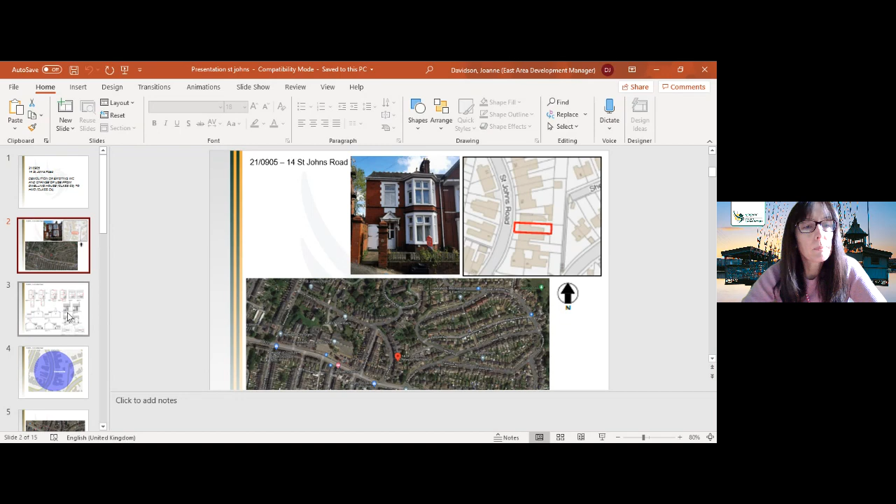So the plans we've been provided with, let me see if I can enlarge these. Okay, so across the top then we've got existing and proposed floor plans. Now the lawful use of the property is a dwelling, but you'll see possibly on these plans that we have multiple bedrooms on the existing plans, and I think we've explained this in the report, that the last use of the property was actually as a HMO, and again I'll go into a little more detail on that as part of this presentation. So what we've got in terms of the proposed ground floor is 2 bedrooms here, front and back, with communal space then towards the rear of the ground floor.

We then have 3 bedrooms on the first floor, beg your pardon. So 1 here under my cursor, and then a small room at the back, and then 1 proposed in the attic space. The only changes, other than obviously a little bit of demolition work on the back, which is this bit here, hopefully you can see my cursor, so that's being demolished. And the only other change, which we are linking to a recommended condition based on the licensing officer's comments, is the change of this door on the rear to a window as it serves a proposed bedroom. So that's it as far as the elevation and floor plans are concerned.

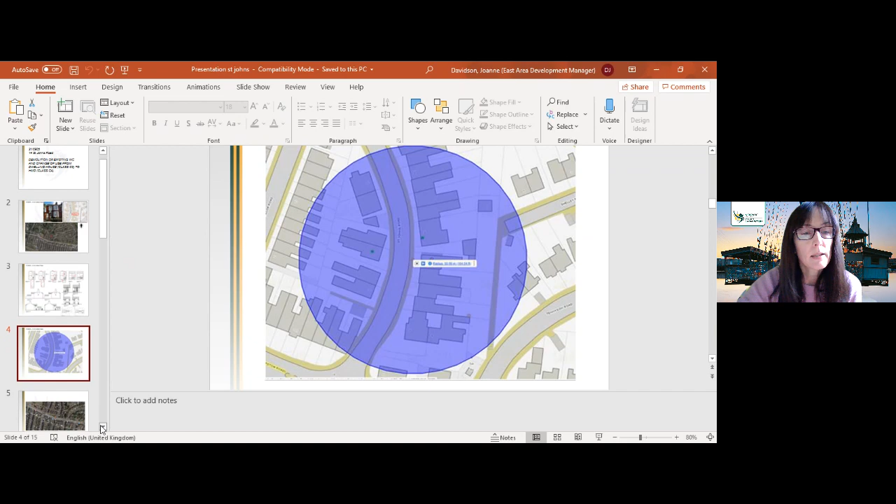And you may be able to see on here some green dots. So I'll hover over them on my cursor here and here. They're existing HMOs according to our records. And the actual site is under my cursor now here. So as you can see, if planning permission were to be granted today for this HMO, we would have 3 houses within this radius that would be in HMO use according to our records. That's 3 of 18, so that is 16.6%. Not the 15.8% we've cited in your report. So that's an update. And again, I'll further confirm that in this presentation.

So for those who aren't familiar with St John's Road and putting it into context, this aerial image perhaps gives a little bit more detail. So the main road we can see here under my cursor is the main Chepstow Road. And you can see St John's Road coming off here. Again, putting it into context, this is Eveswell Primary School. You've got, I think, just off the top here, Kensington Court Clinic.

But notably what we've said here is we've got bus stops to be noted. Under my cursor again, here, here, here. All within 500 feet, 150 metres of the site, and as I mentioned, along with the primary school, but also we've got a range of shops and services along Chepstow Road.

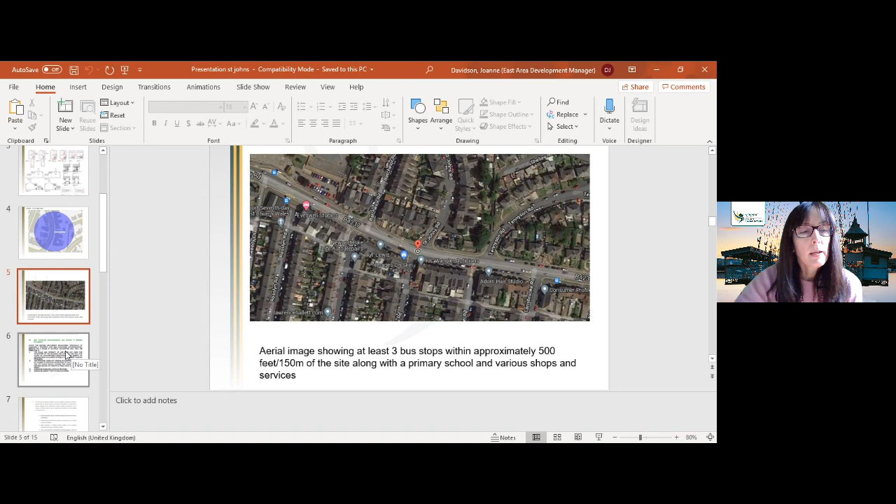So the key policy in the adopted local development plan relevant to our consideration of HMOs, and many of you have seen this before, is policy H8. I won't read it out, it's there, but it sets out the criteria and the main issues that we will consider when we are looking at HMO applications, and I think they're self-explanatory, and we'll go on to those further now in this presentation.

So, as you know, we also have the adopted supplementary planning guidance on HMOs that was adopted in 2017. And this is a relevant extract, I think. It sets out the positive elements of HMO conversions in terms of variety of housing stock. But we also know from past experience and knowledge that HMOs can also cause concerns and adverse effects, and these are set out in these bullet points here. Okay, I can always go back to that slide if you need me to, just let me know in due course.

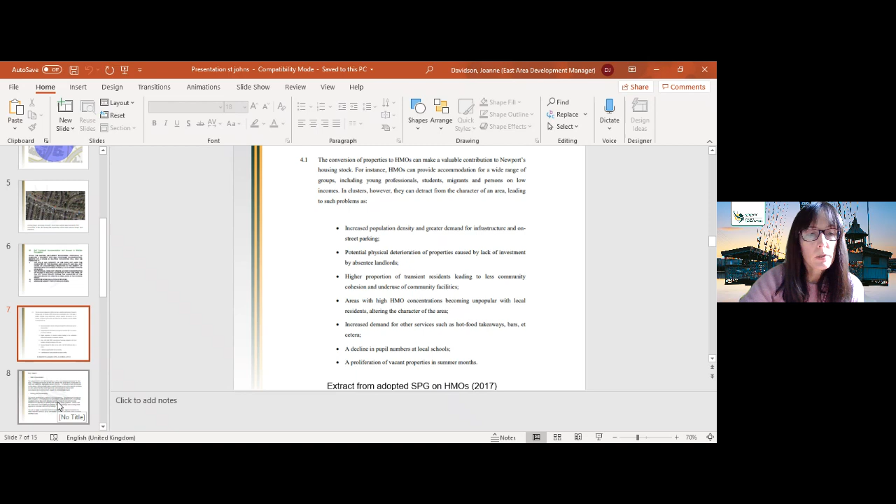So the key issues then, and again, like I say, we're probably familiar with these now because we've seen these many times before, are in officer view, HMO concentration matters and parking and sustainability issues. So for the purposes of this site, the adopted SPG on HMOs identifies a 10% concentration threshold, not the usual 15% that we have seen on other sites. So the threshold here is actually lower.

It's 10%. So granting permission for this site, as I mentioned earlier, this is a slight difference to what's cited in your written report, will take the proportion of properties in HMO use within the highlighted area to 16.6%. So clearly above the 10% threshold set out in the adopted SPG. And that needs to be given very careful consideration.

Now we know, again from past experience, that to robustly refuse a permission on HMO concentration issues, demonstrable harm must be shown, as previous appeal decisions on sites where the threshold has been exceeded prove that a mere exceedance does not by itself equate to demonstrable harm. And in your written report, we've pointed to a case on Llanthewy Road where we had exactly this issue. And in fact, I think that was about a 23% concentration there. And the inspector confirmed on that one that a mere exceedance does not equate to refusal or a robust refusal.

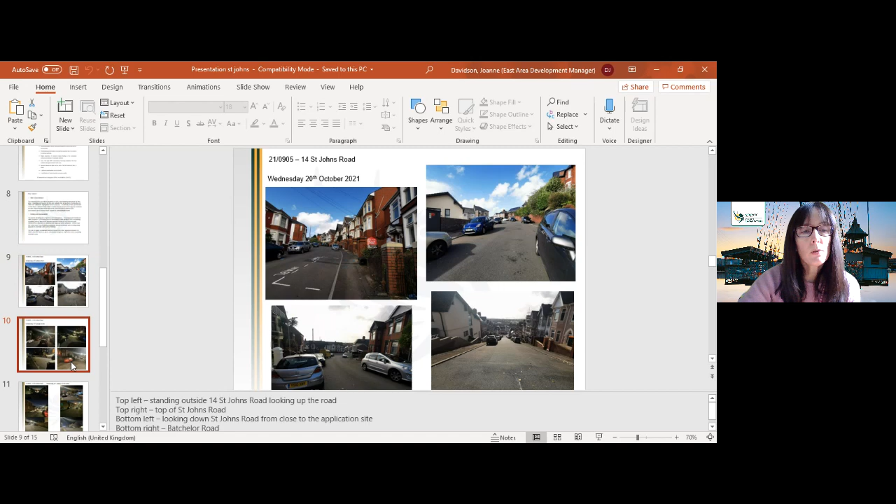So a few more photographs that we've taken as officers. And again, we've given the date and the time of these photographs on the top of the slide. So again, similar top left, looking up St John's Road. So these are evening shots when we would expect parking to be in higher demand. Top right, again, further along or up St John's Road, and again bottom left, further up St John's Road, and then an adjacent street on the bottom right, Batchelor Road.

And you can see from our site visits during the weekday evenings that we've noted there are parking spaces. And whilst I wouldn't say parking was consistently plentiful, nevertheless, parking spaces do arise. So our conclusions then on parking matters, as we know that this is very much an important issue to people interested in this application. You'll note from your written reports that we consulted 70 properties, 70 addresses on this application. We've had 3 objections and parking obviously is a concern. The councillors have also raised this matter.

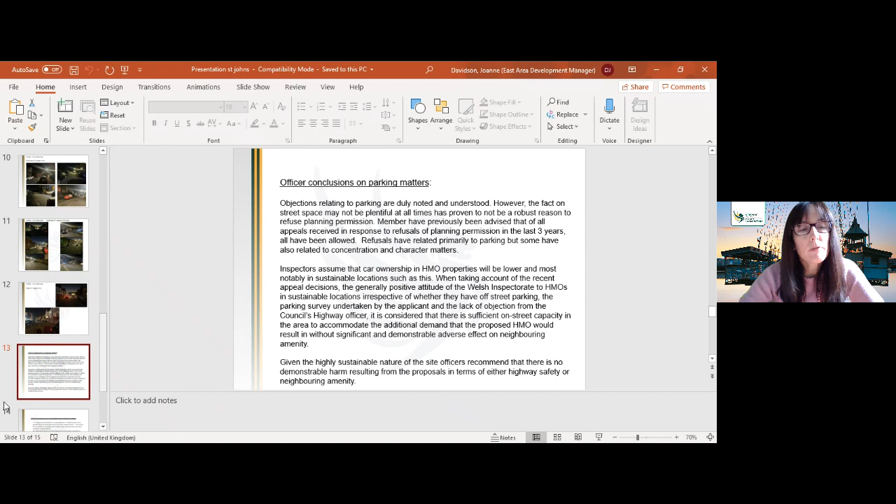Now, inspectors assume, rightly or wrongly, that car ownership in HMO properties will be lower, and most notably in sustainable locations such as this. And when taking account of recent appeal decisions, the generally positive attitude of the Welsh Inspectorate to HMOs in sustainable locations, irrespective of whether they have off-street parking, along with the parking survey undertaken by the applicant and the lack of objection from the council's highway officer, it is considered that there is sufficient on-street capacity in the area to accommodate the additional demand that the proposed HMO would result in, without significant and demonstrable adverse effect on neighbouring amenity or highway safety for that matter. Now, given the highly sustainable nature of the site, officers recommend that there is no demonstrable harm resulting from the proposals, as I've said, in terms of either highway safety or neighbouring amenity.

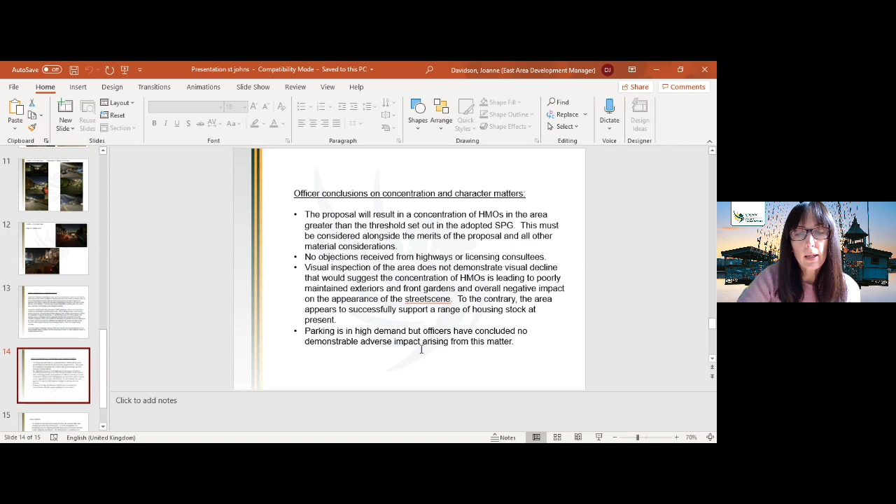So, officer conclusions on concentration and character. The proposal will result in a concentration of HMOs in the area greater than the threshold set out in the adopted SPG, as I've confirmed, and this must be considered alongside the merits of the proposal and all other material considerations. Now, we've got no objection from highways or licensing consultees, as you know, and visual inspection of the area does not demonstrate to officers, at least, a visual decline that would suggest the concentration of HMOs is leading to poorly maintained exteriors and front gardens and overall negative impact on the appearance of the street scene. To the contrary, we think the area appears to successfully support a range of housing stock at present. Parking is in high demand. We would agree with that, but officers have concluded no demonstrable adverse impact arising from that matter.

So other matters, and I touched on this at the start of the presentation, that I thought committee members should be aware of, and we have picked it up in our report. The property has been previously licensed as a small HMO, and it was occupied as such from 2015 to 2020. And in 2015, occupation of a dwelling by up to 6 unrelated people living as a household in a HMO, or what we would call a HMO now, did not require planning permission. So no enforcement complaints were received by the local planning authority for the duration of that use.

And on 25th of February 2016, and the reason you're seeing this application now, is that new regulations were introduced that created this new use class C4. So this puts small HMOs into a separate use class to a dwelling. So dwelling remains in use class C3. Now, the effect of this was to enable local planning authorities to control changes of use from dwellings to small HMOs. And a small HMO is a residence of 3 to 6 unrelated people living together as a single household. So the above new regulations could not be applied retrospectively. So I hope that slide is self-explanatory.

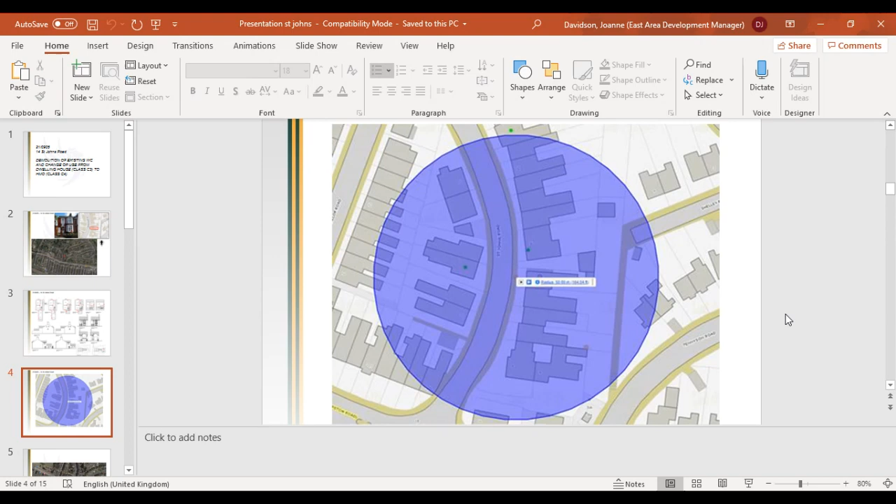It does, thank you. One of the points I wanted to raise about it was it depends where you centre that circle. If you centre that circle, say, a couple of metres to the right, or the east as we're looking at it, then you would capture the properties on the bottom right-hand side. And then if you move the centre of that circle down a bit, then you would, so when you've got properties that are say 80% captured,

it seems a bit unfair in a way to leave them out, like the one that you've got at the top of the screen there. You've got an HMO, and just by virtue of where you put the centre of your circle, that one is excluded. So it's a bit of a subjective operation, I think.

I'm not sure if it's subjective, Councillor, because obviously we draw that line in accordance with the SPG and how it sets out that we should draw it. But there is, I suppose, a potential dialogue to be had in terms of whether the 50 metres is the right distance to draw, whether you should put the centre point slap bang in the middle of the address point, the actual footprint of the house, or the middle of the front garden.

But I suppose the basic point is that there has to be a line somewhere if we're going to apply a test of this nature. So what you see in there accords with the SPG as adopted and as it sets the test out right now. And clearly, if there is to be a dialogue about that test, whether it be the extent of the radius or anything else, then that needs to be done separately as part of a separate discussion over the content of the supplementary planning guidance, I would say.

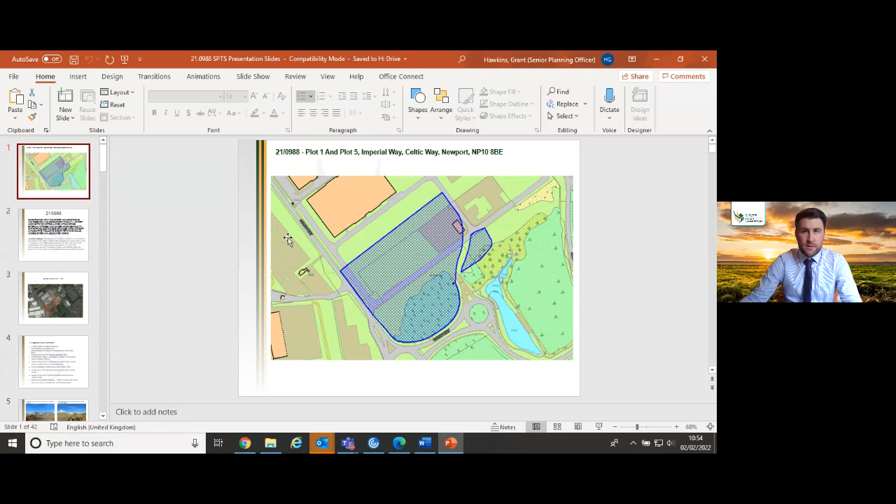Can we all see my full screen there, please, Chair? Yes, indeed. Brilliant. Okay, so this application at plot 1 and plot 5 Imperial Way, sorry, on Celtic Way. The site is outlined in blue here. So the application is for the construction of a 2-storey manufacturing and research development facility, four-storey administration office linked with a linked atrium space, external storage of nitrogen and oxygen, car parking, sustainable drainage, hard and soft landscaping, access gates and associated works.

So the recommendation, it's a little bit of a long one, I'm afraid, so I'll read it out and then I'll just break down what that means. So we're requesting delegated authority to be given to the Head of Regeneration, Investment and Housing to issue a decision to grant planning permission with conditions. Firstly, subject to a Section 106 legal agreement, also with delegated authority to refuse the application if we fail to agree that legal agreement with the applicant, and on receipt of no objection from Natural Resources Wales. So I will touch upon that.

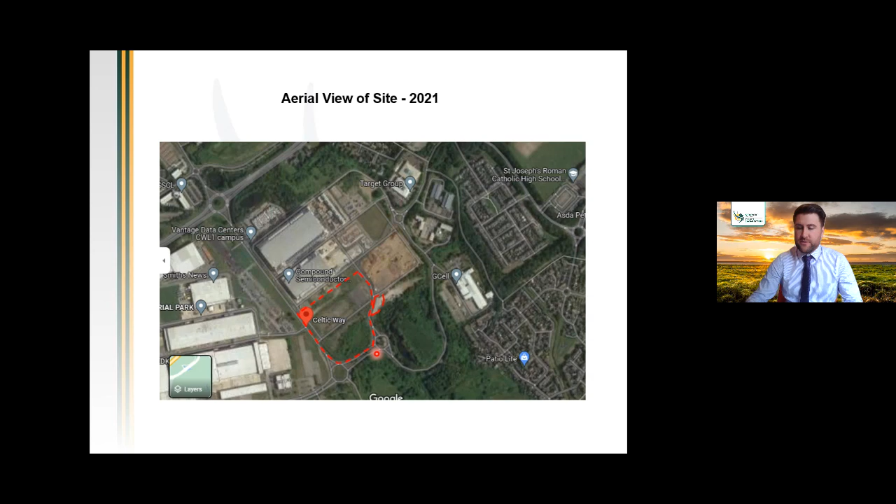And then the site of importance for nature conservation beyond the highway to the south of the site, which is further down here, so to the south of Duffryn Way, which splits the site in that area. 30 metres to the south of the site is an archaeologically sensitive area. Beyond that is the Wentlooge Levels special landscape area, approximately 360 metres south. The Gwent Levels is approximately 350 metres to the south of the site as well. And the nearest residential properties, as I pointed out earlier on the aerial plan, are 300 metres to the southeast and 400 metres to the northeast.

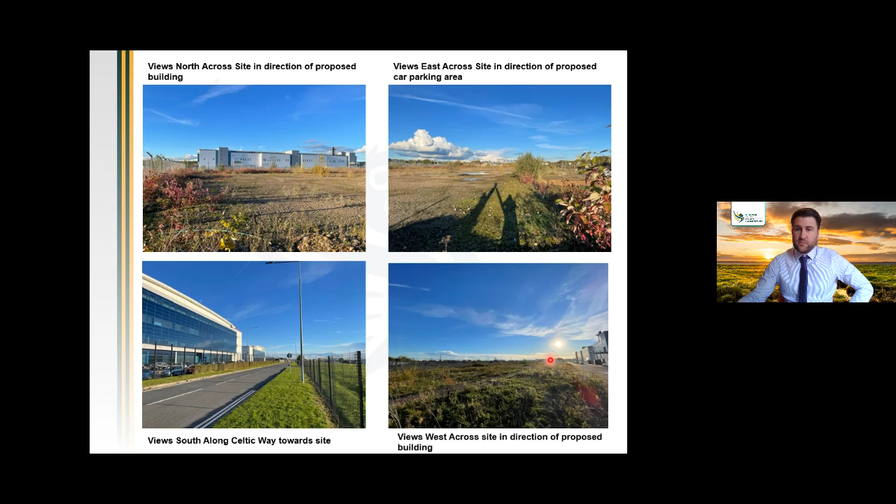The key considerations for the application. First of all, the principle of the development. As I mentioned, it's previously developed land, it's within the urban boundary, and it is designated for employment use and allocated within the local development plan. So in terms of the principle of development, we feel that it's pretty sound and it's acceptable in principle, subject to the relevant material planning considerations.

The social and economic impact of the proposal, the design of the building, visual impact on the surrounding landscape and proposed mitigation measures, impacts on ecology, trees, highway safety and parking, active travel considerations, of which I mentioned there is a financial contribution which we'll touch on later in the presentation, impact on residential amenity, air quality, drainage and flooding, and heritage impact and archaeology. So those are the key considerations that we'll be going through within this presentation and have been considered within the officer's report.

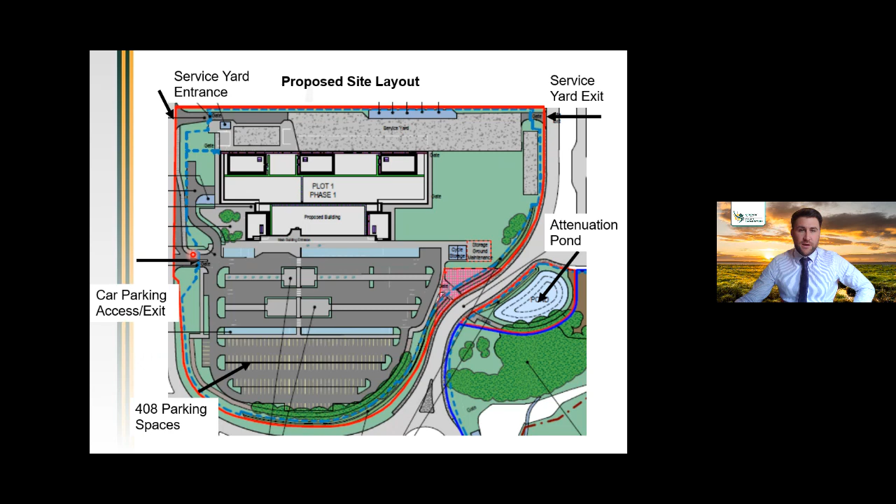I'll run through the elevations and dimensions in a moment, but to the south, the front facing elevation is the primary front of house elevation. This is the 4-storey office and administration building. To the rear is the 2-storey manufacturing and research and development facility. Car parking is located to the south of the main building. There are 408 spaces proposed. The service yard is located to the north, to the rear of the building, where service vehicles will access off Celtic Way and egress onto North Lake Drive. The proposed access and exit for the car park is located off Celtic Way also.

So I just wanted to touch a little bit upon SPTS Technologies Limited, who are the applicant. So this would be their new headquarters. They currently operate from a site at Ringland Way, which is just off the M4 motorway at the Coldra roundabout. So SPTS design, manufacture and sell semiconductor capital equipment, which provides the solutions needed to deliver the next generation of technologies for the semiconductor and microelectronics industry. It's a very highly technical process.

So yeah, broadly speaking, they design and develop, manufacture and sell technology for microchips and semiconductor units, which will go into your everyday technologies, your mobile phones, your iPads and technologies like that. So it's an evolving business based on the fact that we're reliant on technology in everyday life moving forward.

The business were recognised by the Queen, having received the Queen's Award for Enterprise and International Trade across 3 years, and for innovation in another 2 years. The company has been recognised by Welsh Government for their contribution in increasing jobs and growing the economy within Wales, and they've been given anchor company status. SPTS currently employ 360 members of staff at the existing Newport site. They employ 590 across Europe and the wider area.

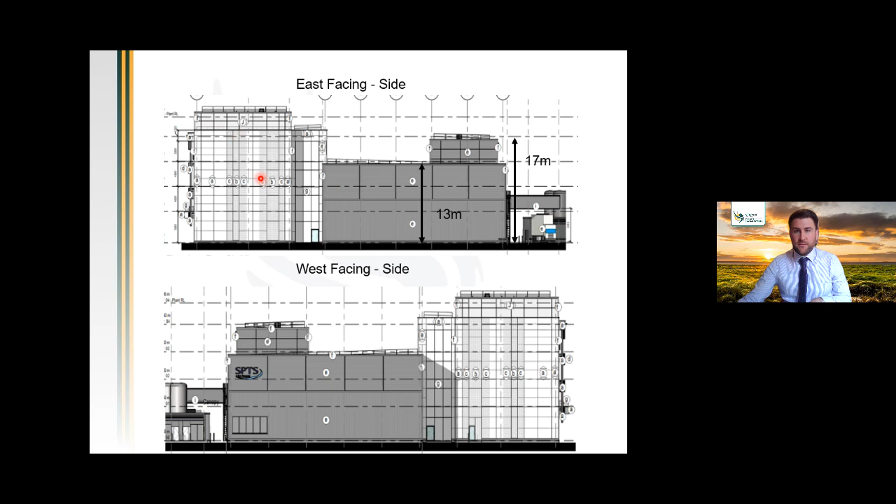So the design brief was to create a bold architectural statement. The 2 mass forms of the manufacturing and administrative buildings are differentiated by the contrast of materials. I'll show you some computer generated images now, because I appreciate these elevations have quite a lot of detail that might not be that clear. But the front of house administration block is made up of powder coated or anodized finished metal sheet cladding panels to give a contemporary modern appearance, with semi-matte black perforated rain screen panels and brise soleil throughout the front elevation.

The rear elevation is more of a dark grey matte or matte black cladding, which is a little bit more simple, a bit more industrial in its appearance, given that it does represent the manufacturing processes which will undertake to the rear. So it's a highly technological business, and the proposal and the processes are taking place within the building, and the team wanted a design to effectively match that nice contemporary looking building.

So here are some computer generated images as we look across the site to the front elevation. This is the south facing administration block. You can see the lower scale, darker manufacturing building to the rear. This is as you look square onto the south elevation from the car park. The main access point is here. This is a recessed gap within the front elevation.

This is looking to the rear of the building, to the side of the manufacturing part. As you can see, there's a canopy here where service vehicles will access and reverse into the service yard, unload and load at the rear. There's some indicative images here of the interior of the building. Just thought it might give some context for what the building may look like inside.

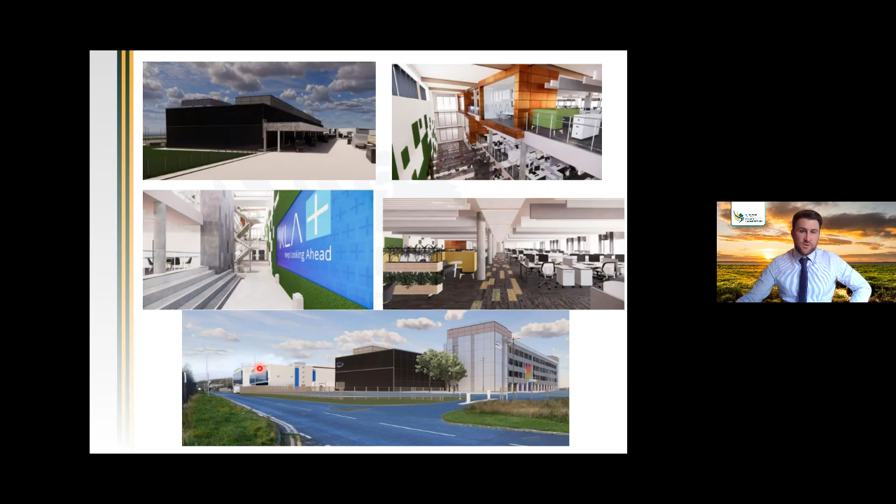This sort of open atrium space, high level office space, lower level office space. As you can see here, sort of the lobby area. At ground floor, there'll be canteen, cafe, meeting rooms, a general lobby and reception. First floor and above at the front will be predominantly office blocks and meeting rooms. And then, as you see here, this is taken from Celtic Way, the front of the building, administration block, manufacturing block, and into other industrial buildings located along Celtic Way.

So I'm not going to go through all of the 4 floor plans because it's quite difficult to show you the exact layouts given the size of the plans, but effectively what we've got at the front 4-storey element here is predominantly open and mixed office use space with meeting rooms, boardrooms, for example, staff welfare facilities and stair routes, along with areas for ducting from the lower ground areas.

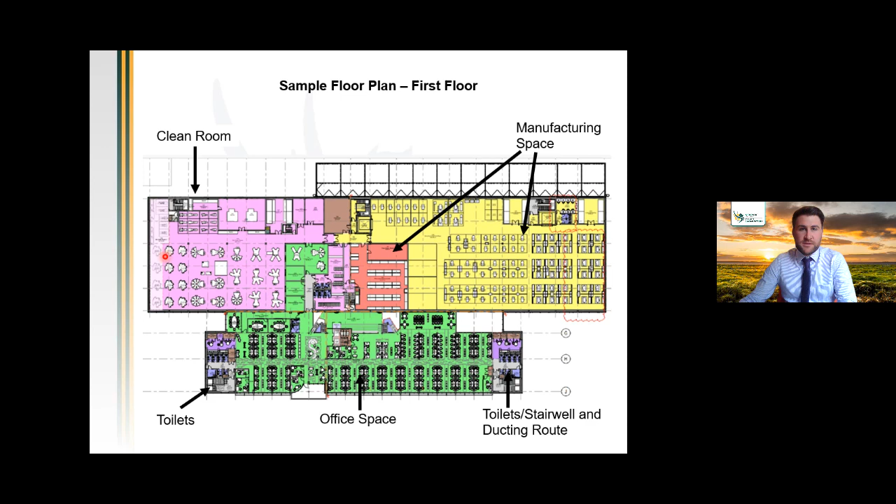To the rear, we've got manufacturing space, as you can see in yellow and red. The pinky purple area here is a clean room. So given the nature of the microprocessors and the technology which has been produced here, they require a clean room to make sure there's no contamination of the product. So this is where I would anticipate you'd expect to see people in bodysuits to make sure that nothing gets contaminated during the manufacturing and research and development process.

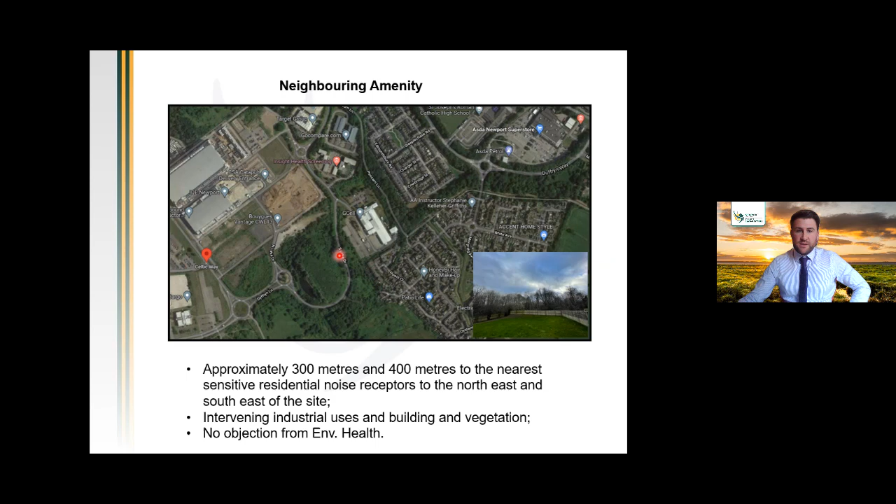So if we move on to neighbouring amenity, as I mentioned, the sites here, you've got residential properties over here and here, intervening landscaping areas, existing industrial uses, highways, approximately 300 metres and 400 metres respectively. So we don't anticipate there's going to be any adverse impact on residential amenity given the significant separation distances and intervening uses and vegetation. We've had no objection from environmental health either. There are some conditions that we'll be proposing to protect residential amenity.

There will be plant equipment set within the roof behind the walls on the roof. Prior to the installation of those, we'd like a noise assessment to see whether there's any mitigation required to quiet that plant equipment. The construction environmental management plan will control working hours in line with the working hours of the other construction developments within the vicinity of the site which are currently underway, and also to protect measures such as dust, noise, vibration, so fairly standard things that you'd expect within a CEMP.

There isn't any piling works proposed for the foundations of the building. However, we have put a restriction on the hours of any piling work just in case that does change, in order to protect residential amenity. The lighting of the site is not anticipated to cause any wider issues for residents given the significant separation distances and intervening buildings and vegetation. But again, we want to see a final external lighting scheme via condition.

We've also put a condition on restricting the use class of the building, specifically to what they're applying for, i.e. the manufacturing of the semiconductor equipment and the associated office space, just in case the building changed hands and there were issues raised over and above what had been considered within this application.

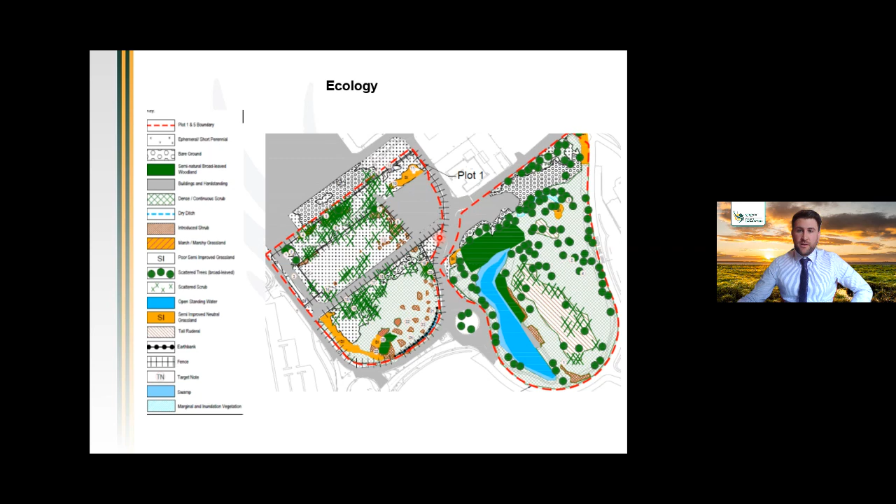So the application originally included a preliminary ecological appraisal of the site, including that habitats plan that I just mentioned. The Council's ecologist and Natural Resources Wales requested updated surveys and reports in relation to ecological interests to make sure that we have a full understanding of what the impacts might be, what mitigation, compensation, enhancement measures will be applicable.

Consequently, the site was reduced on plot 5. An area of woodland has been retained, which acts as a buffer between the site and the SINC, which is the pond to the south of plot 5. So we consider that to be a merit. The following list of information was submitted with the resubmission of the ecological information. So effectively, these reports and surveys all fed in to the ecological impact assessment and the updated soft landscaping plan.

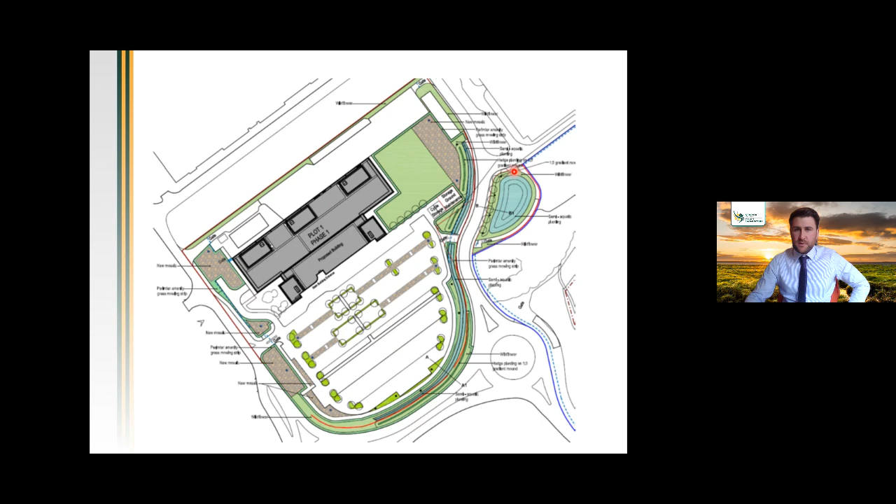This table has been taken from that landscaping plan, which shows a breakdown of the square meterage of each of the proposed planting types. So that gives us a clear indication of how much has been replaced in terms of mitigation, compensation and enhancement. So the Council's ecologist has reviewed the submitted information that was submitted in January, and they generally support the mitigation, compensation and enhancement which is set out in the ECIA.

However, what they have raised is that there should be stronger links between that report and the landscaping plan. That should be in the form of diagrams, to make sure that we know exactly what we're getting on the plan, where we're getting it and how that report translates spatially onto the landscaping plan. It's been discussed with the ecology officer that could be secured via condition discharge, so we can secure those details via condition.

With regards to Natural Resources Wales, they have been reconsulted on this information, but owing to the date that it came in, their 21 days, which is the statutory period for them to respond, doesn't expire until later on this week. So at this stage, we haven't had a final response from Natural Resources Wales, which is why we're requesting delegated authority from the committee for the application to be approved, and delegated powers on the basis that we don't get an objection from Natural Resources Wales.

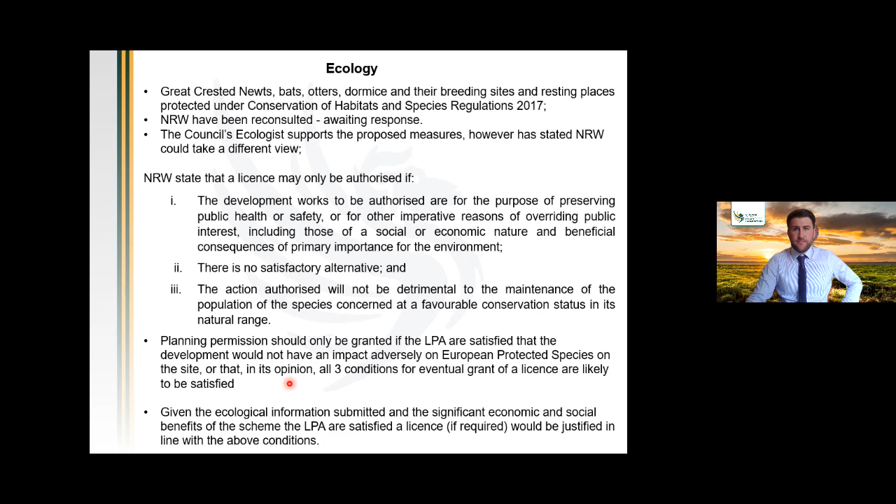So that's ecology. Oh, one more slide, sorry. Yeah, I think I've just summarised in there what I've just mentioned. So if we do get an objection from Natural Resources Wales in relation to the ecological matters, we will try and resolve that between the applicant and Natural Resources Wales if there's minor amendments or tweaks that can be made. But in the event NRW do maintain their objection and we cannot come to a satisfactory agreement, then we would have to bring the application back to be determined by the planning committee.

So moving on to the landscaping and visual impact for the scheme. As I mentioned, the site's located in plot 1 and plot 5. So plot 1 is where most of the built development will be. The landscape officer has raised no objections to the proposed building in principle, but has raised concerns about the external proposals, the layout of the site and its landscaping and the overall materiality of the site.

So a landscape visual impact assessment was initially submitted with the application back last year. However, the landscape officer does not feel that this adequately addressed the overall impacts of the proposal, particularly at a more localised level within the industrial estate or on the publicly visible spaces around the site. It was therefore requested that a new visual impact assessment was submitted. However, this hasn't been received. So an assessment has been made based on the information that has been submitted and is before the local planning authority. And I've also carried out site visits from the various viewpoints that have been outlined as required by the landscape officer.

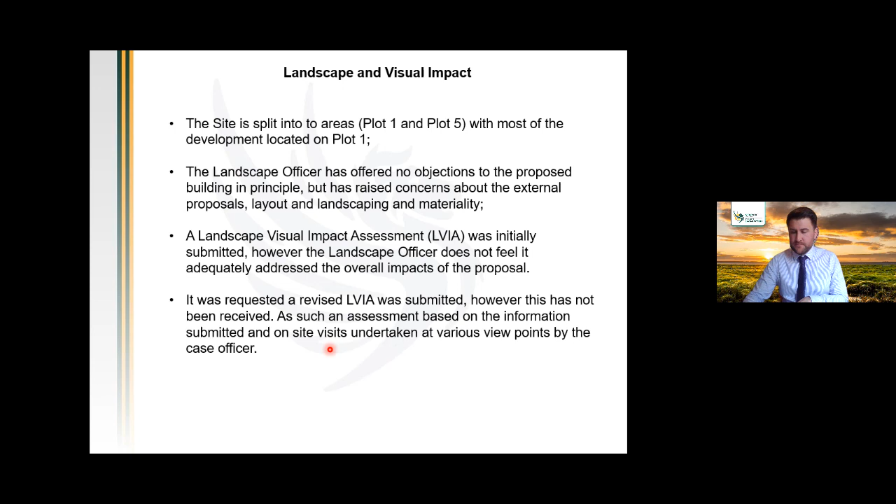So these viewpoints from the wider area were requested from the Wales Coastal Path, the footpath near St Mary's Church in Marshfield, which is a grade 2 listed building, and the Northwest Residential Development. So this photograph here was taken by myself from the Wales Coastal Path. It's approximately 3 kilometres from the site. This blue dot here is where I was stood when I took the photograph. The direction of the photograph is towards the site over here.

Now you may or may not be able to see, depending on the size of your screens, just above my red cursor there's the top of a white building. That is one of the existing buildings on site. Now that existing building has a maximum height of 24.5 metres. The proposed building as part of this application would broadly be located to the south of that site, sort of in front of that site, and will go up to a maximum height of 21 metres. So it is a few metres lower than the highest point of the building that you can see there.

So there may be views visible from the Wales Coastal Path, but given the 3 kilometre separation distance, given the scale of the proposal and the existing buildings on site, officers consider that there isn't any significant or adverse impact on visual amenity or the landscape from the Wales Coast Path.

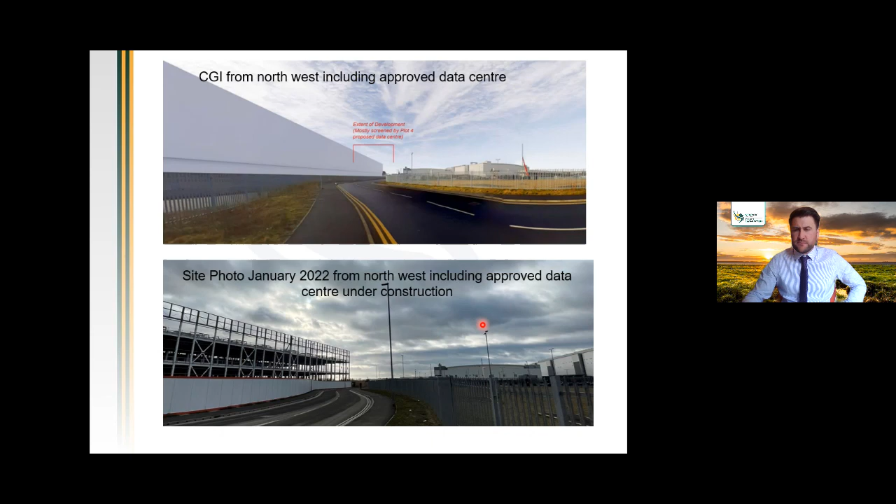So this is a CGI image taken from the north west of the site along Dufferin Lane. Shows the anticipated viewpoint of the building here, the administration block with the lower manufacturing units behind. Just over here you can see that data centre building which has been approved and under construction.

And again, this is a photograph taken from Dufferin Lane this month. This is the existing IQE building, which the proposed site is just to the south of. Then you've got the under construction data centre over here.

So just to give you a visual context of the site, the concerns from the landscape officer with regards to the immediate visual impact is that the proposed planting scheme along these boundaries, along the southern boundary and around, is quite low-lying vegetation. There are some trees, but perhaps they're not structural trees, so they may not do an awful lot to screen what is quite a big building from the immediate highways and public walking ways.

Officers, there's no reason based on the landscape plan put forward that more structural planting and better screening couldn't be achieved on site around the perimeters. So we are suggesting that a condition is applied to the conditional regime, which requires further details of landscaping, soft landscaping for the site and the hard landscaping of the site. So we're confident that we could achieve something on the perimeters which is perhaps better than what's initially been suggested within the landscape details.

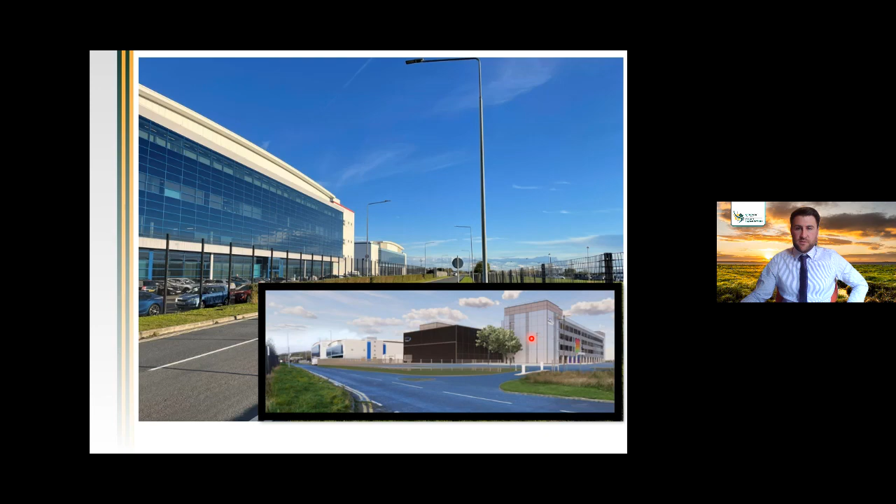So to summarise, the site does face the sensitive landscape to the south, which is the Wentloog Levels Special Landscape Area. It is located within an existing industrial estate and amongst other buildings of similar scales. For example, the original data centre building is 200 metres wide by 105 metres in width, at a height ranging between 22.25 and 24.5 metres. The recently approved data centre to the northeast is 142 by 100 metres to a height of 20.6 metres.

Our building is 135 metres total width, a maximum height of 21 metres, but the main bulk of the building will have a maximum height of 17 metres at the front and 13 metres to the rear. And the depth is, I think, about 80 metres. So again, the landscape officer has no objections in principle to the building, but there are concerns with the visual impact on the immediate surrounding area, which we think can suitably be secured via conditional discharge.

Moving on to highway safety and parking. So owing to the scale of the development being a major planning application and owing to the size of the building and footprint, a transport assessment was submitted with the application. This has been submitted along with TRICS data for comparable uses, as well as data from the existing SPTS site at Ringland Way. The council's highways officer has reviewed and is satisfied that the traffic impact on the surrounding area will not be significant.

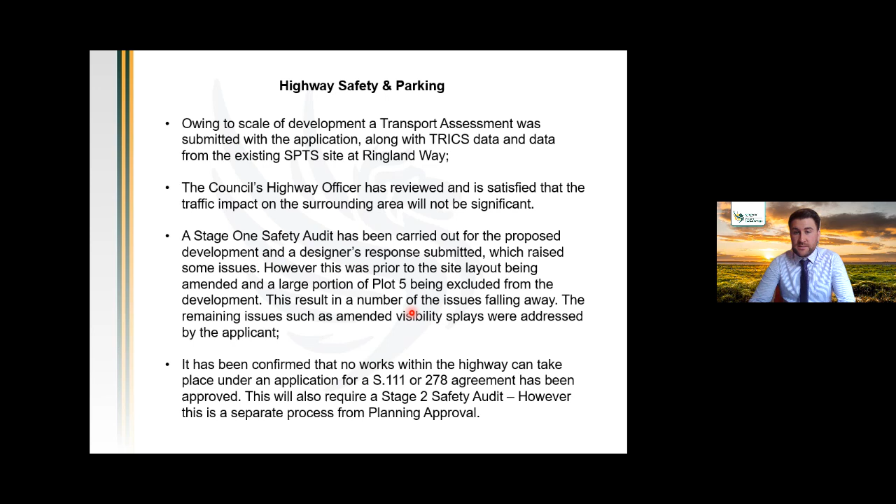Highways have confirmed that any works within the highway would need to take place under the relevant highways agreement, so a section 111 or section 278 for works within the highways, and these would also require stage 2 safety audits to be undertaken. However, these are separate processes from planning approval.

So if we move on to parking, the first table there shows the parking requirements for the proposed uses of the building in accordance with the SPG. The second table takes those uses, compares that with the parking requirements, the relevant floor area of that section of the building, and then creates the total number of spaces for each breakdown. So the total number of required parking spaces based on the SPG is 390 parking spaces.

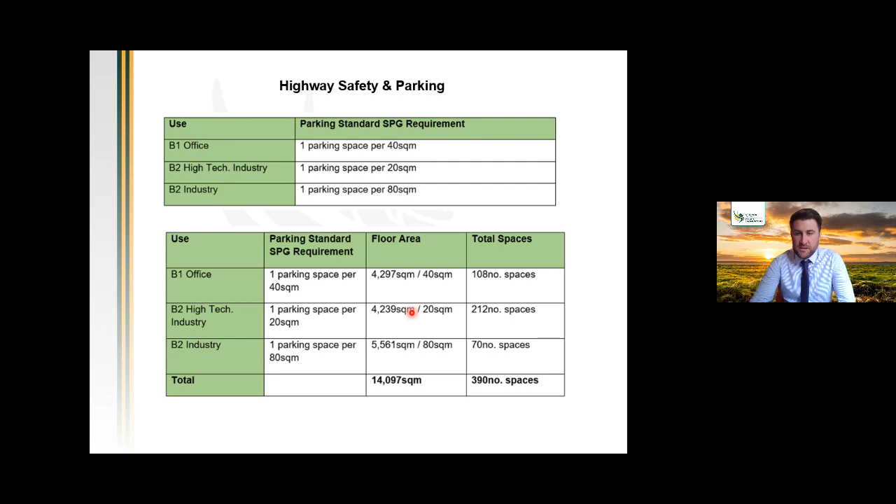So, staying on the same subject, but moving on to active travel. A travel plan was submitted with the application. This is a statutory requirement for any major planning application. That includes measures to be incorporated at the site. So in terms of cycle storage, it's been calculated based on 350 members of staff working at one shift at a time. 88 cycle spaces that are secured would need to be provided, along with 18 open short-term spaces. The site plan shows the location of the secured cycle storage, and a condition is recommended to agree the specific design and visual appearance of that.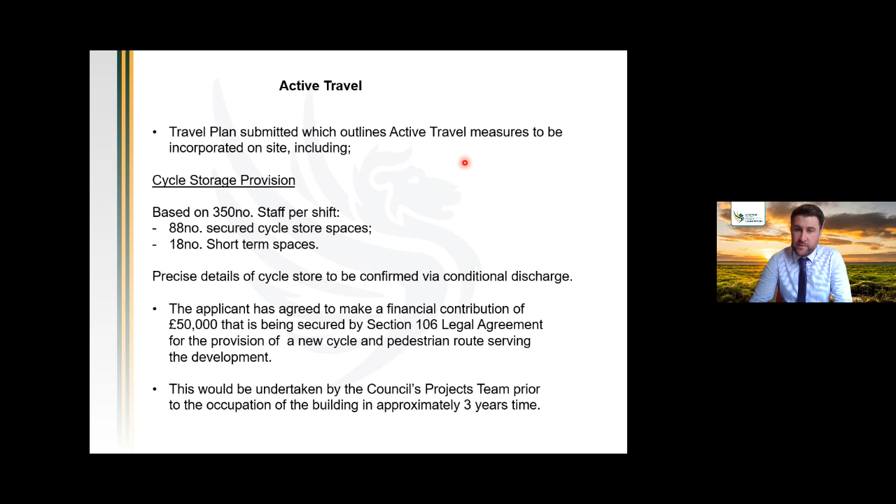Also, for this application, it was requested that the applicant makes a financial contribution, which is secured by Section 106 legal agreement, for the provision of a new cycle and pedestrian route serving the development. They've agreed to pay a contribution of £50,000. The works would be undertaken by the council's projects team prior to the occupation of the building, which is in approximately 3 years' time.

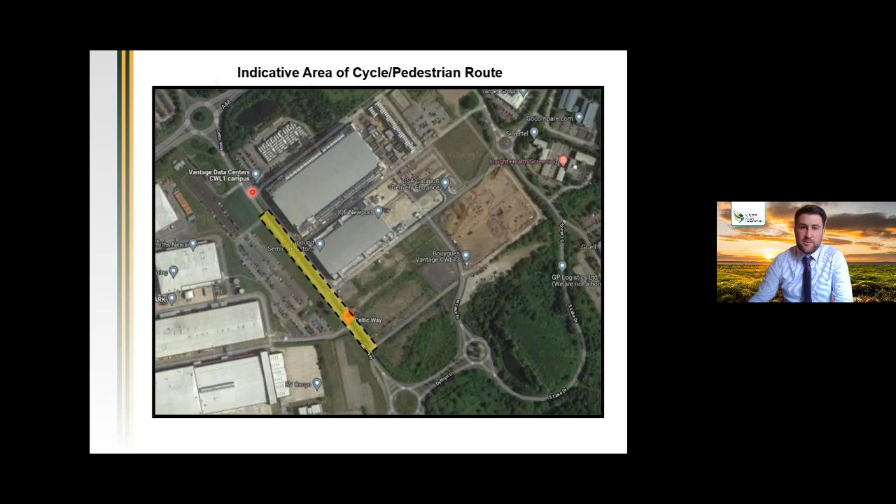So the reason for this is the site is located here, along Celtic Way, as identified in yellow. There is no pedestrian footpath either side. It is highway verge. So there is no safe route to encourage active travel or sustainable modes of pedestrian access to the site from Celtic Way, because this footway terminates at the access to the data centre here. So this yellow hatched area here broadly identifies the location where the pedestrian and cycle route would be installed by the council's project team. This would then link up to the footway, bus stops, etc. located on the A48. So that is considered to be a merit of the scheme to encourage active travel to the site.

So moving on to air quality, an air quality assessment was submitted and reviewed by Environmental Health. This raised no issues. The site is not located within an air quality management area, nor is it within a buffer zone. A condition was requested by Environmental Health to secure details for HGV routes during the construction period to avoid AQMAs. This is suggested to be controlled via condition discharge.

The council's environmental health officer also requested a financial contribution towards the monitoring of air quality within the vicinity of the site. For planning purposes, that would have to be secured by a legal agreement. However, a Section 106 agreement can only be sought when it would be necessary to make a development acceptable in planning terms, would be directly related to the development, and would be fairly and reasonably related in scale and kind to that development. The site isn't located within an air quality management area or even a buffer zone. The AQA concluded that there would be no significant impact on air quality from this development. Therefore, we didn't pursue any financial contributions towards monitoring, as this didn't seem reasonable or necessary in this instance.

So flooding and drainage. First of all, the site is not located within a flood zone, so there's no flood consequences assessment required. However, owing to the size of the development, it does require sustainable drainage systems. This would be separate approval from the council's SAB, which is the Sustainable Urban Drainage Approval Body.

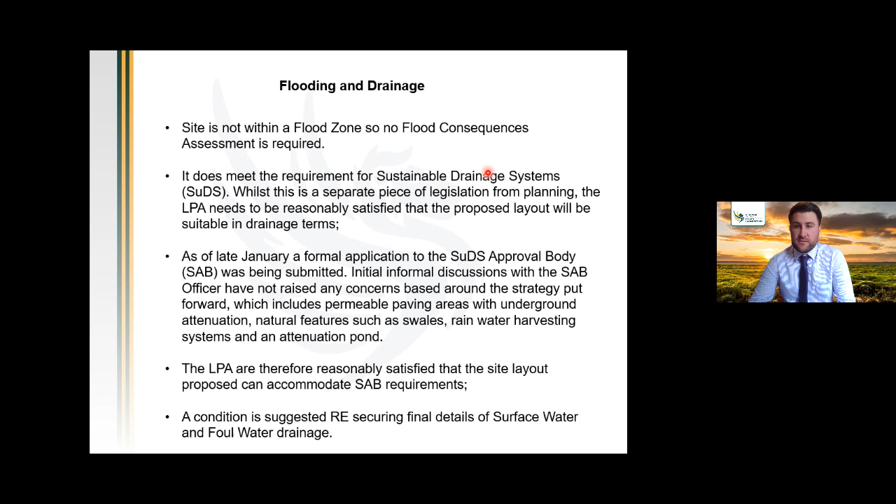In principle, the SAB officer confirmed that this all seemed to be fine and didn't anticipate there being any major issues. So overall, we're satisfied that the site layout that we would be approving as part of this permission would be able to accommodate the SAB features. However, we would apply a condition just to secure final details and implementation of the surface water and foul water drainage arrangements.

In terms of heritage and archaeology, a desk-based assessment was submitted, reviewed by the Council's Historic Building and Conservation Officer. It was concluded that there'd be no material impact on any setting of any historic assets. Cadw were consulted as part of the PAC report and took the same view. In terms of archaeology, there's a sensitive site nearby to the south of the site, but this site has already undergone ground disturbance, and there's not considered to be any remains on site that would be impacted. So Glamorgan Gwent Archaeological Trust have offered no objection to the scheme.

So if we just summarise the key considerations, the site is for the reuse of previously developed land within the urban boundary, which is allocated for employment use in the LDP. This would allow SPTS to expand the existing workforce within Newport from 360 staff to 460 staff on occupation of the building, with this phase of development designed to accommodate future growth up to 650 staff. There would be future expansion opportunities onto the adjacent plot, which will be under the ownership of the applicant, and could relocate existing European processes to Newport and create further job opportunities. I must highlight that that is not something we can really give weight to, but it's just showing there are opportunities for this company to expand further within land that they own adjacent to the site.

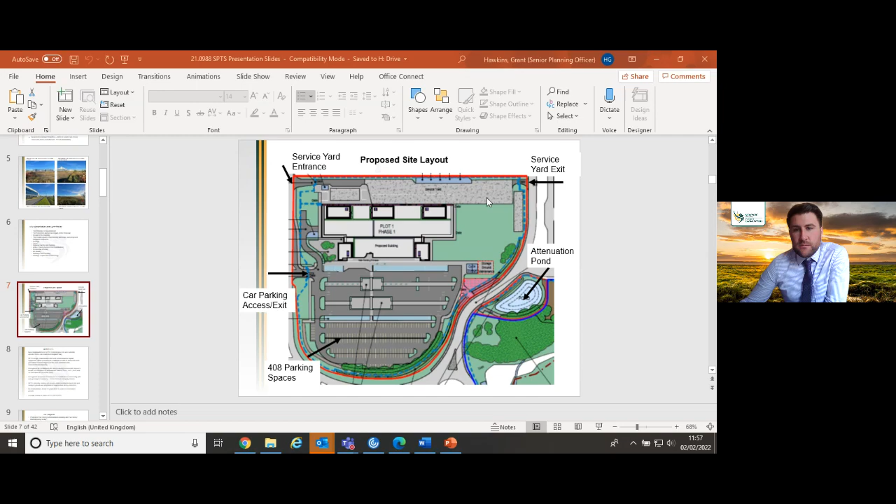What concerns me is, as I say, effluent, which is not supposed to go into the drainage system. How do they actually? I can understand everything except that bit, that the service yard goes into that pond and then it goes into the drainage system. And obviously, we're talking about the service yard. It could be fuel, petrol, anything really.

So I don't want to say something that isn't strictly true, so I'm going to be careful what I say. But I understand that reed beds are proposed within the site. Now, I don't know if that's explicitly with regards to the attenuation pond, to potentially clean any water. That may not be applicable for the attenuation pond. But what I would say is the SAB application, which is a separate planning approval, does look at the sustainability of drainage, but not only that, there's certain criteria that need to be met. Now, one of them is biodiversity.

So within the scope of that application, if you're looking at possible filters or things like that, which you typically associate, if you did have a car park, for example, you would have oil interceptors, because anything coming through the drains would intercept the oil prior to it being released. I would suggest that is something that may be looked at under SAB. Notwithstanding that, we do have a surface water and foul water drainage condition attached. So we could require specific details of that if necessary when we are discharging that condition.

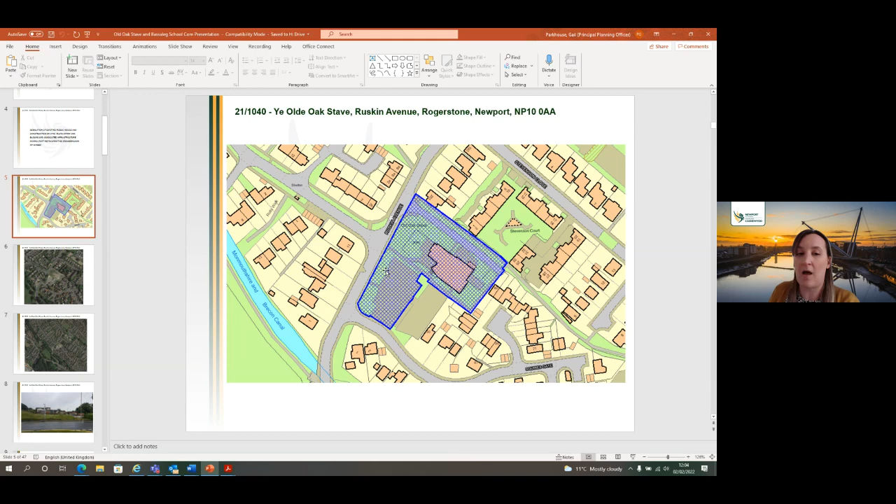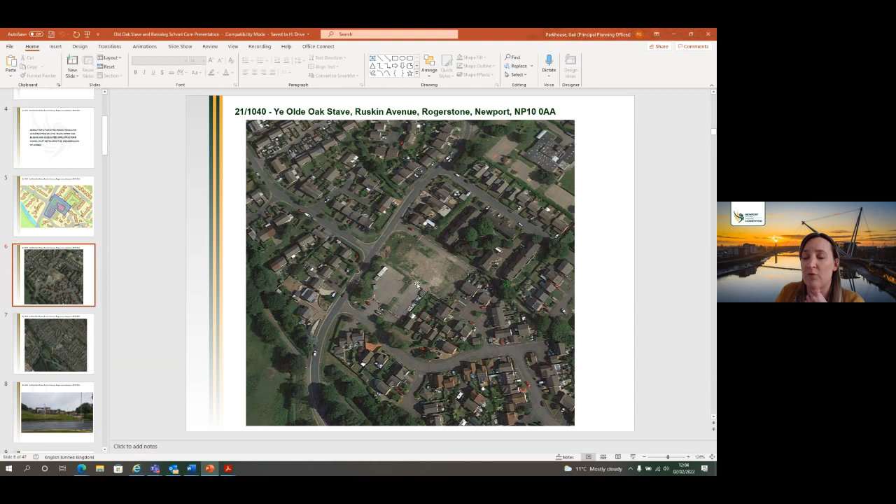Like I said, it's for 21 flats and associated infrastructure works, including car parking. So I'll just give you some aerial views of the site to hopefully jog some memories. It was previously occupied by a pub or restaurant, which is now being demolished, as you can see on the slide. You've got Ruskin Avenue running along here, and I'll give you a slightly wider image. So this is the site in here. You've got Ruskin Avenue running along here. You've got Cefn Road to the south here. And then you've got Mount Pleasant Primary School here, and then the residential areas of Mount Pleasant and the wider areas of Rogerstone.

And then also, just to mention, you've got the Monmouthshire and Brecon Canal running along here. So the reason why this application has come back to us is to propose the omission of 6 affordable housing units from the scheme, which were previously secured through a legal agreement, along with contributions towards leisure and education. The scheme otherwise is unchanged.

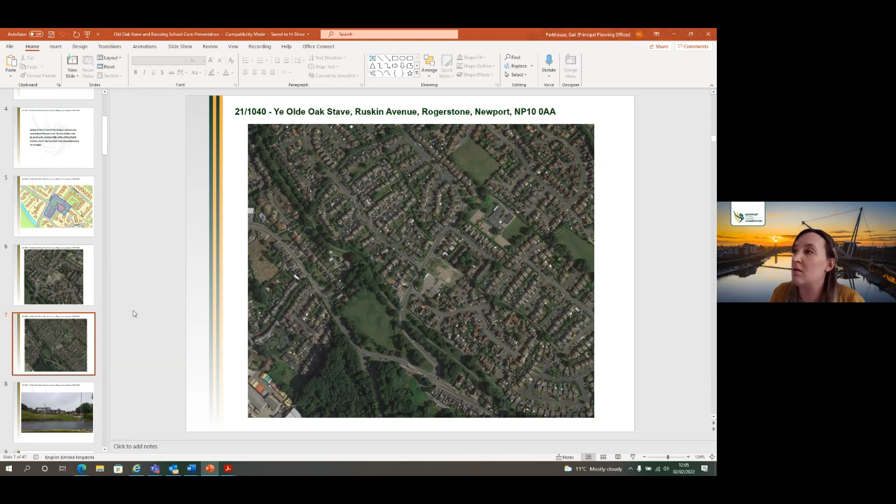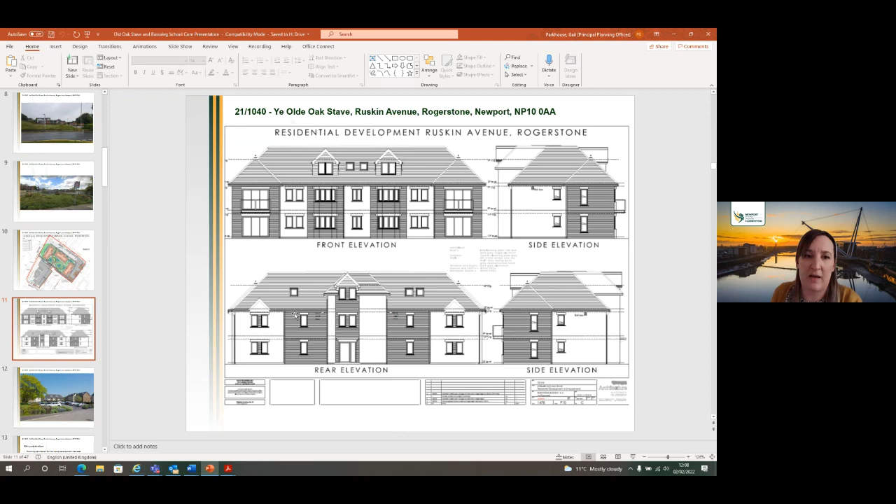And I will just show you a computer generated image of the site taken from the southern car park. You'll note that there's 3 houses. You can just see the edge of one house there, 3 houses here. They're separate from the site, but they also have an extant planning permission. Works haven't started on those yet, but it just gives context of what the site would look like with both developments being built out.

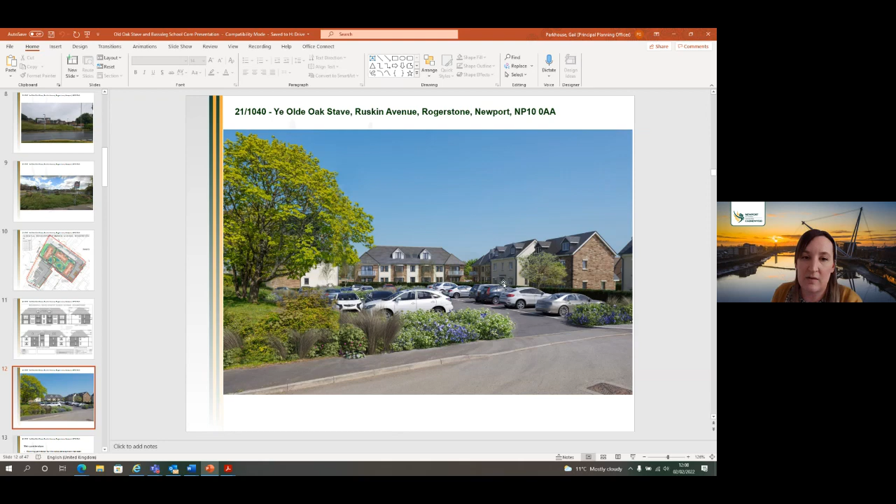Okay, so the main considerations then. These were the matters which were considered previously, so highways and access, residential amenity, design, air quality, noise, ecology, landscaping and trees, waste and drainage, all were considered acceptable by planning committee. Other than the discussion about contributions, I'm not going to run through every other issue because, as I said, the scheme is unchanged. Those matters were previously considered acceptable by planning committee, and the applicants can lawfully build out that scheme. It's also worth noting that there's been no change in LDP policies since that decision, and no new and relevant supplementary planning guidance has been adopted. So the policy framework is exactly the same.

So that really then just leaves the issue of the planning contributions and the omission of the affordable housing. Please note the applicant continues to agree to the education and leisure financial contributions, which are around 44,000 for leisure and 38,000 for primary education, which would still be secured through another legal agreement.

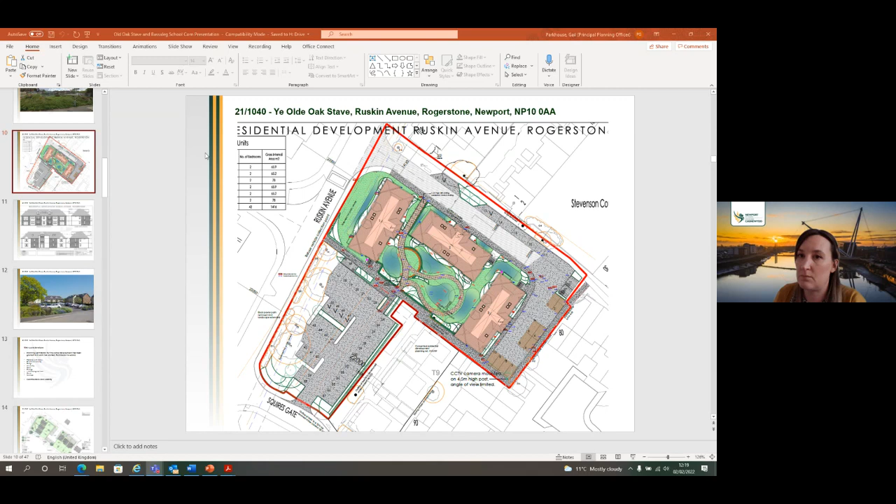I think allowing the refuse lorry to park there on the junction of Ruskin Avenue, it's just when children are going to school, which is just about 200 metres up the road there, and people are leaving for work. Can you see that that is the junction where Ruskin Avenue goes round in a loop? It's going to jam up the whole estate. So I think the traffic considerations are difficult, but there we are. Thank you, Councillor Forsey.

If I move on then to Councillor Trevor Watkins. Thank you, Chair. One question to the officer. What is the difference in the makeup of bedrooms in this application compared with the previous application? Is it exactly the same? Are they all 2-bedroom, or 3-bedroom, 1-bedroom flats? Do we know? The scheme is unchanged. Last time it was proposing 21 2-bed flats, and that is still the case now. So all 2-bedroom flats. Okay, thank you.

Okay, I've got something flashing up. Can you carry on now, Trevor? No, I'm okay. That's all I wanted to know, Chair. Okay. Did you catch that, Gail? Yes, she did, and she answered it. Oh, well, I didn't hear it. Okay, fine. As long as you were satisfied. Thank you very much. Anyone else indicating they wish to ask a question?

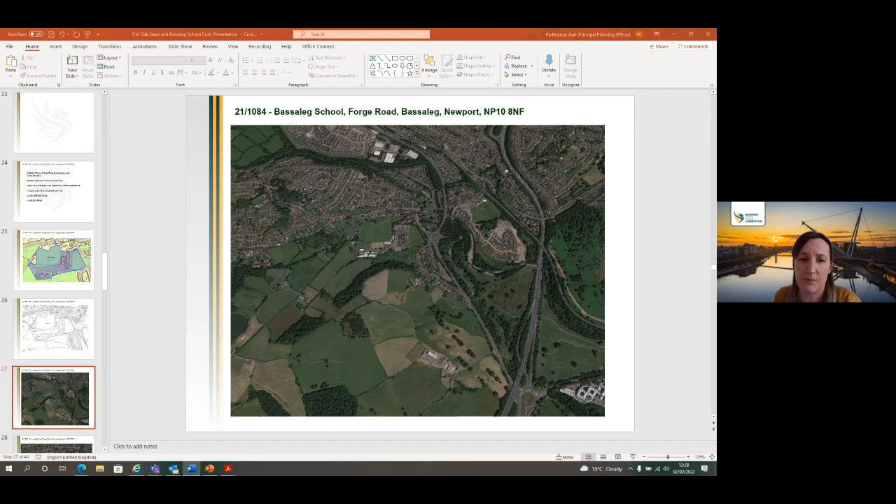Okay, the school site itself can be described as having two main teaching areas. You've got the Forge building here, which is the older part of the school, which is a former grammar school, I believe. It's had multiple extensions and additions in the past. There's a large playing field at the front of the building. There's existing car parking to the north, and then an ad hoc car parking area to the south, and also this area here is the existing school bus drop-off and collection point.

There's two entrances into the site. This is the main entrance here off Forge Road, and then there's another entrance here off Court Crescent. This is Court Crescent here. Both are vehicle accesses and are closed during the school day for obvious security and safety reasons. Then there's the Griffin building, which was built around the 1950s or 60s, and a more modern art block in this location here. This is an all-terrain pitch here, and this is a hard play area here. There's also some additional car parking here and here, which is accessed from the Griffin, which runs along here.

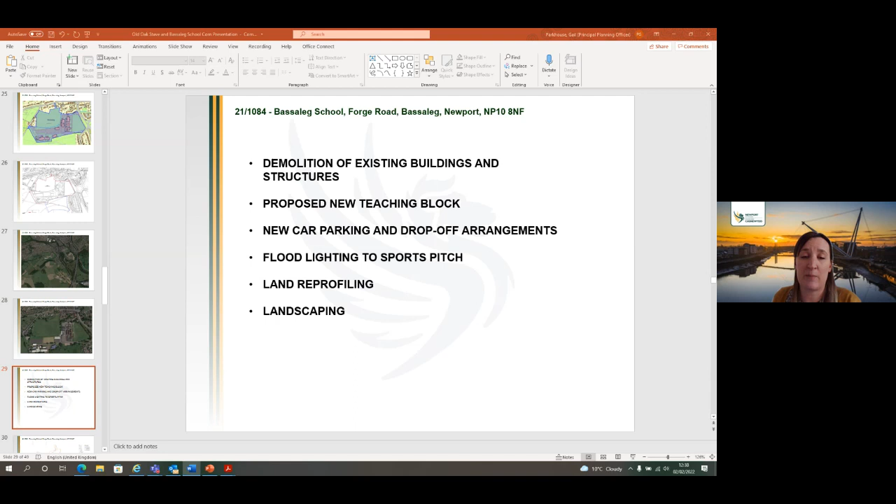Okay, so as I said, the application is for demolition of existing buildings, a new teaching block, car parking, floodlighting, land reprofiling and landscaping. The proposals are part of the 21st Century Schools programme. The school is nearing capacity, and the proposed development would allow the school to accommodate the anticipated 287 additional pupils by 2023. There would also be an associated additional 17 staff. It's the second application for Bassaleg School that committee has seen in the last year. You may remember the first application, which was for new sports pitches, which I'll show you.

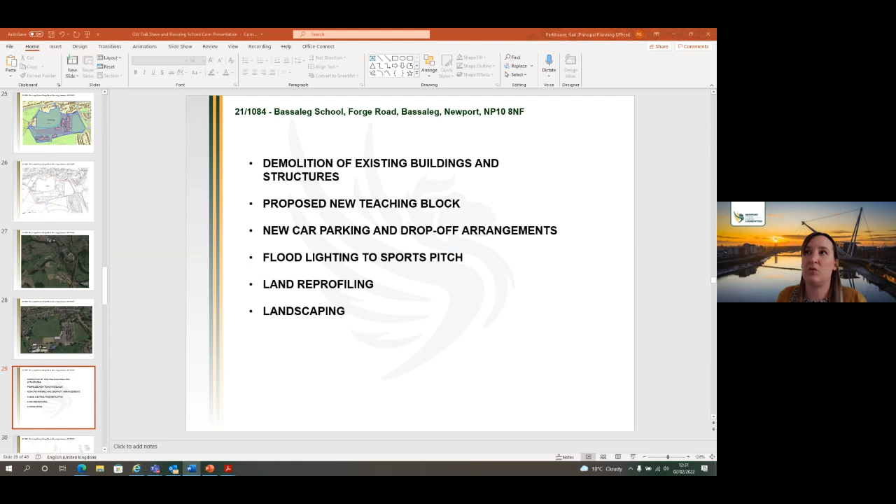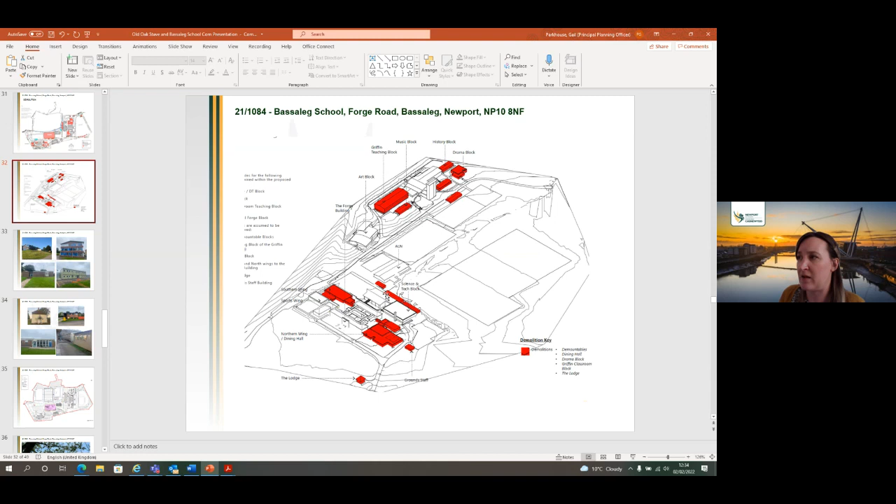Looking then at the Forge building, you've got the southern wing here and then the northern wing here. The southern wing provides some classrooms at the moment. The northern wing provides a dining hall. And then there's also the lodge building and a ground staff building. So it's proposed to demolish those. And then these buildings here are demountable buildings, so they would be removed.

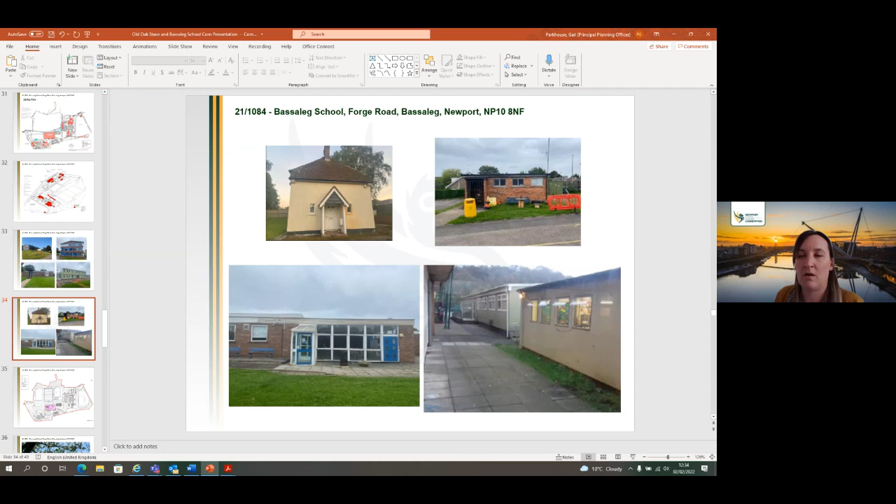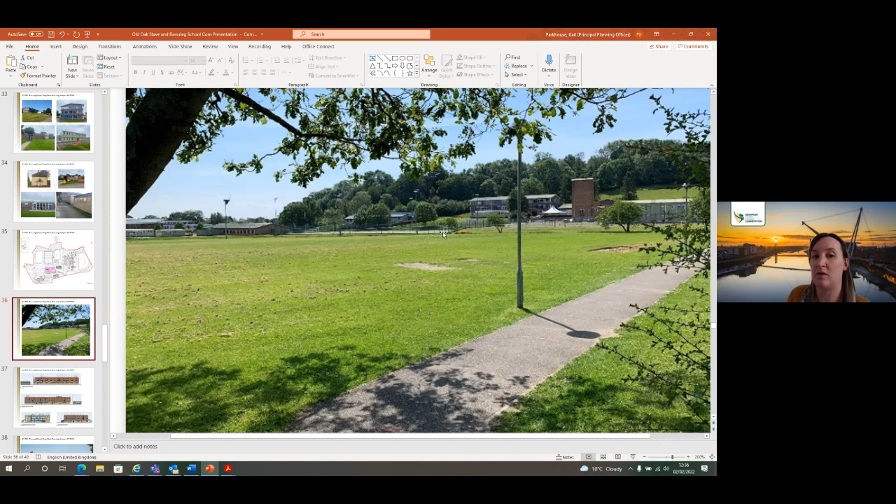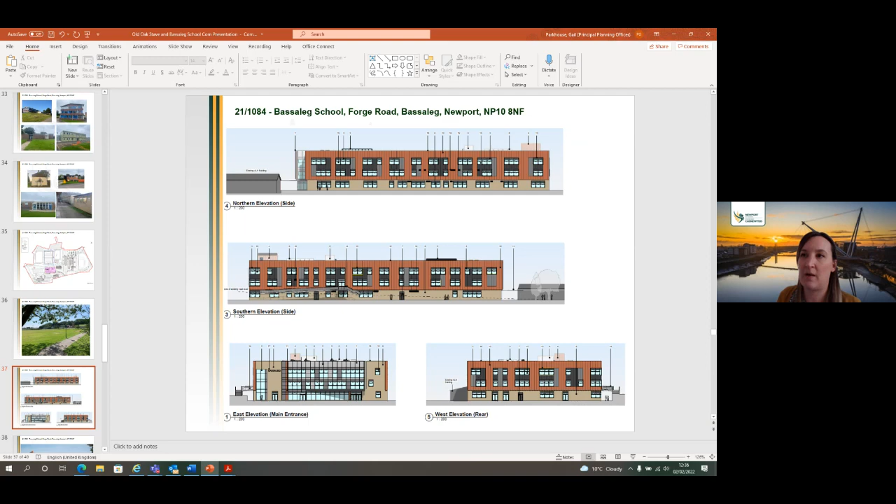And then some elevations of the proposed building. So it would be a 3-storey building finished in brickwork and cladding. There would be extensive glazing throughout, with the front elevation being predominantly glazing, and that would mark the focal entrance point of the building. And I'll give you some computer generated images of that new building here. You can see that this is the front of the building with that extensive glazing, and then this is taken from that new plaza area leading up to the front elevation of the building.

Moving on now then to the car parking arrangements. So I'll just take you back to the layout. So new car parking is proposed in this area to the north of the Forge building, and then it's this area here to the south, and then this would be the new bus drop-off and collection point here, but I'll zoom in to all of these areas just to give you the detail.

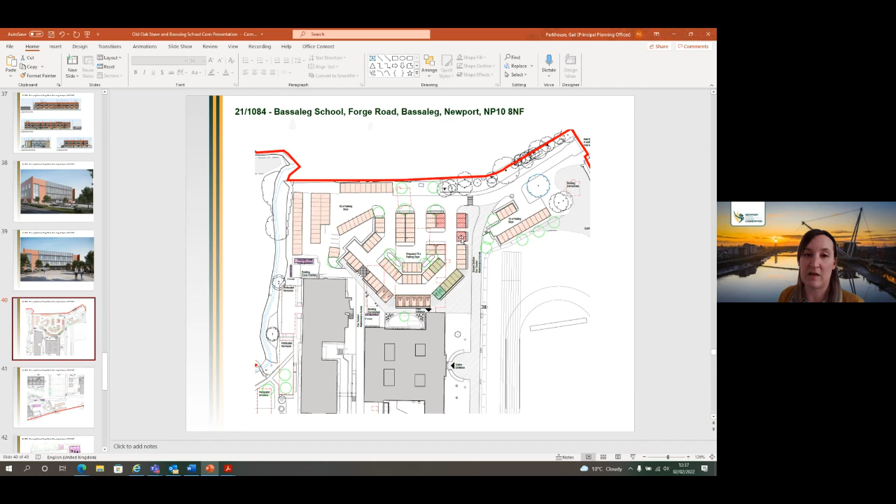So the first area then to the north of the Forge building, this would provide 147 spaces, including 2 electric vehicle points, and infrastructure then for a further 8 electric vehicle points, 7 disabled parking spaces and 8 car sharing spaces. The area to the south of the building would provide 19 spaces. So across the 2 areas, there would be a total of 166 parking spaces.

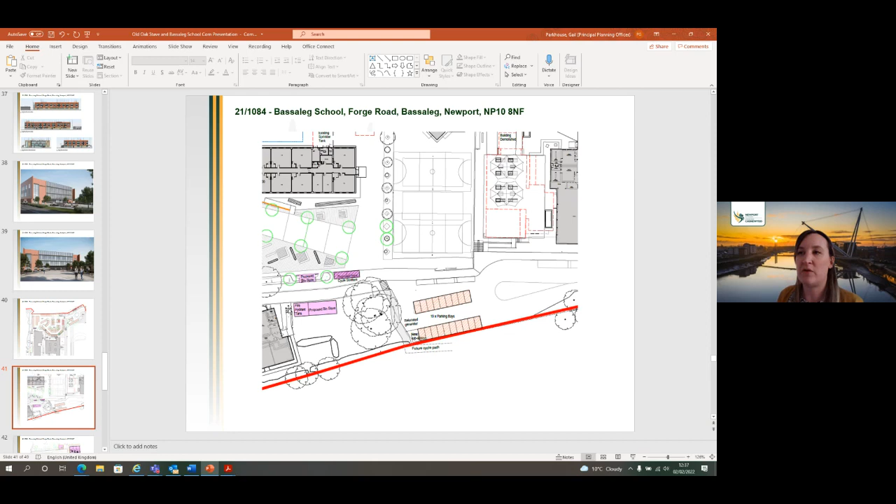There's a third area of parking within the school site in front of the Forge building, which will provide 42 spaces. These are for community use associated with that central 3G pitch, and they were granted as part of the sports pitch application. They're not part of this application, but I just wanted to show you their position for information purposes.

Looking then at the bus drop-off and collection area, this is a section of bus bays which would be lengthened. So at the moment it stops in around about this location. So it's proposed to lengthen it so that more buses can park, and also to include this sort of loop here, which will allow buses to manoeuvre much better and improve safety of pupils.

Floodlighting then, 6 floodlighting columns are proposed, which I'll show you on the layout plan again. 1, 2, 3, 4, 5, 6 floodlighting columns to light up the previously approved 3G pitch.

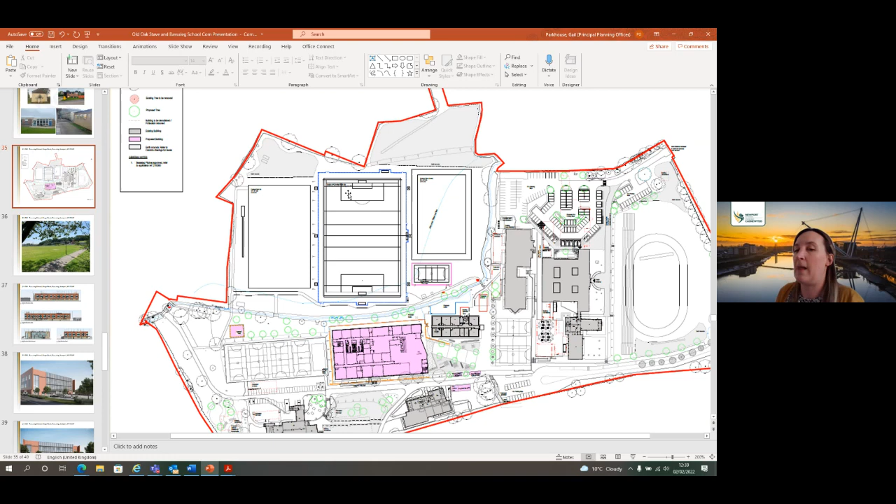They would be 15 metres high, and they would be, like I said, lighting up that central sports pitch only, which is for community use outside of school hours. So the permitted hours of the sports pitch granted by that previous consent are 5 PM till 9 PM on weekdays, and 9 AM to 5 PM on Saturdays and Sundays. No use on public or bank holidays.

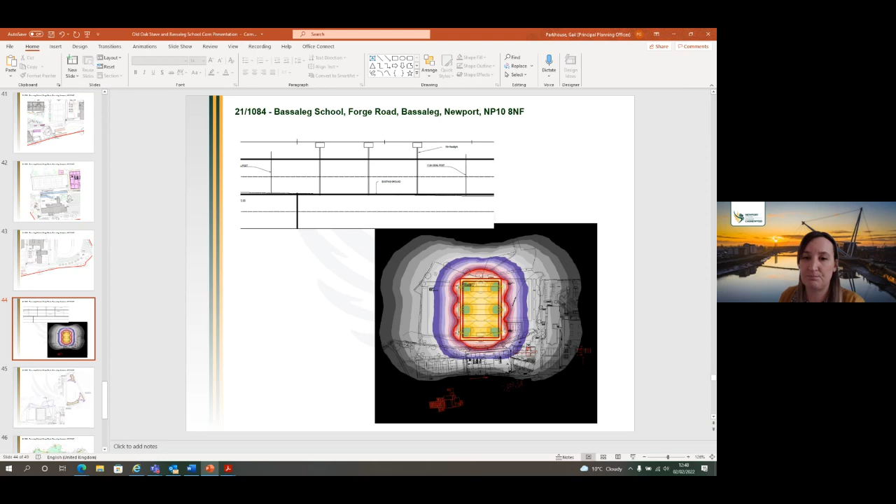Next was the land reprofiling. So it's proposed to create 4 areas of earth mounds across the site. 2 would be created in the main sports fields, which are these areas here and here. They both have shallow gradients up to a maximum height of 1 metre above the existing ground level. The other area would be taken in the playing field in front of the forge building.

This area here has already got some variance in the ground level, so the height ranges from 1 metre up to 2 metres in height of those earth mounds. And then the other earth mounds would be at the south end of that playing field, and they would have a maximum height of 1 metre.

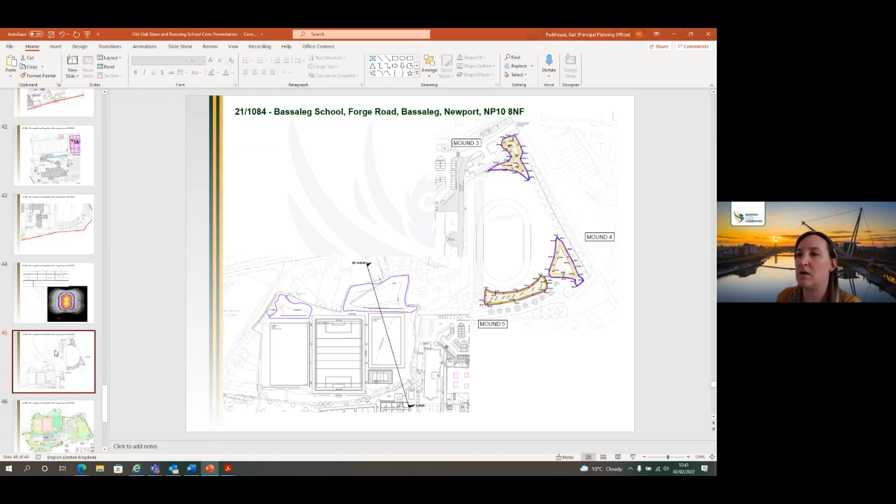Looking lastly then at landscaping, it's proposed to remove a limited number of trees to facilitate the proposal. Replacement tree planting is proposed at a ratio of 2:1 for those lost. There's a small stream crossing the site, which I mentioned, and it's proposed to create some swales, a new grassed area and tree planting adjacent to this. There would also be some landscaping within the northern car park, and then new tree planting along the bus drop-off and collection area.

2 new outdoor social spaces would be created for pupils. You've got that plaza area, which I mentioned, so there'll be landscaping and tree planting within that area. And then also with the demolition of the southern wing of the forge building in this location here, that would be opened up to a hard social area really for pupils, but also including some landscaping opportunities too.

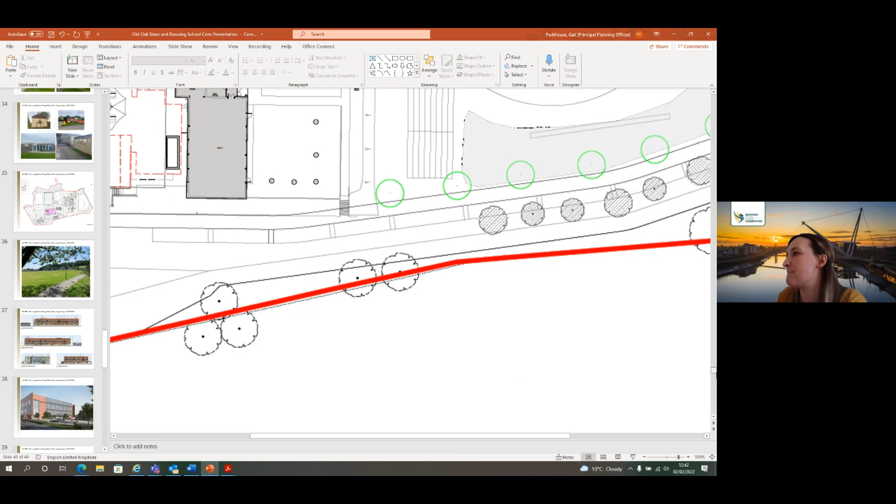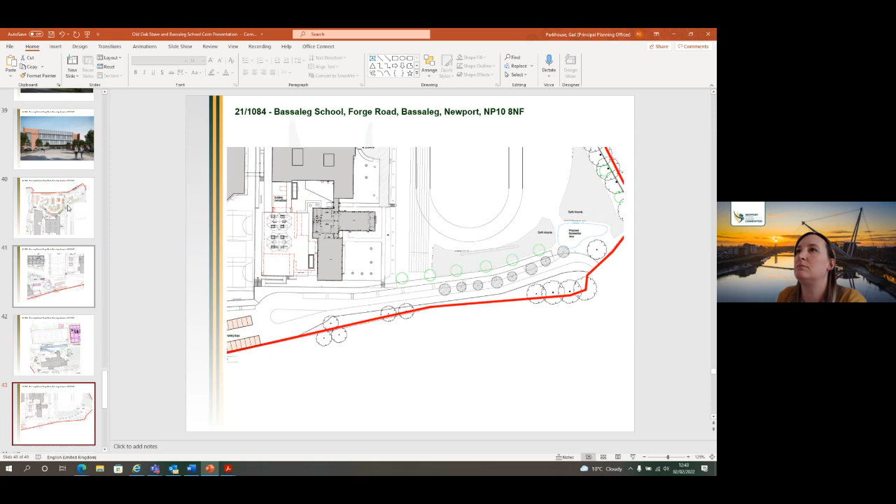Just to mention some other associated works, it's proposed to create a link to a future cycle path or a shared use path to connect to Court Crescent, which I will show you on the layout plan if I can zoom in. Oops. Sorry, I'm getting there.

Right, okay, it's not great quality this, but there's a grey area here, which is a connection to a future shared use path, which would connect to Court Crescent. And the idea is that would create opportunities for pupils to access the site as a pedestrian or on bicycles.

The bin stores are also proposed in this area here. You can see them highlighted in pink, along with a bike shelter in this area here, a further bike shelter in this location here, and then there will be some cycle hoops in this location and adjacent to the 3G pitch. So 40 bike spaces within shelters and 23 cycle hoops.

Where the eastern wing of the Griffin teaching block would be demolished, it's proposed to regrade that land and seed it with a wildflower mix with some tree planting to enhance the outdoor provision for pupils.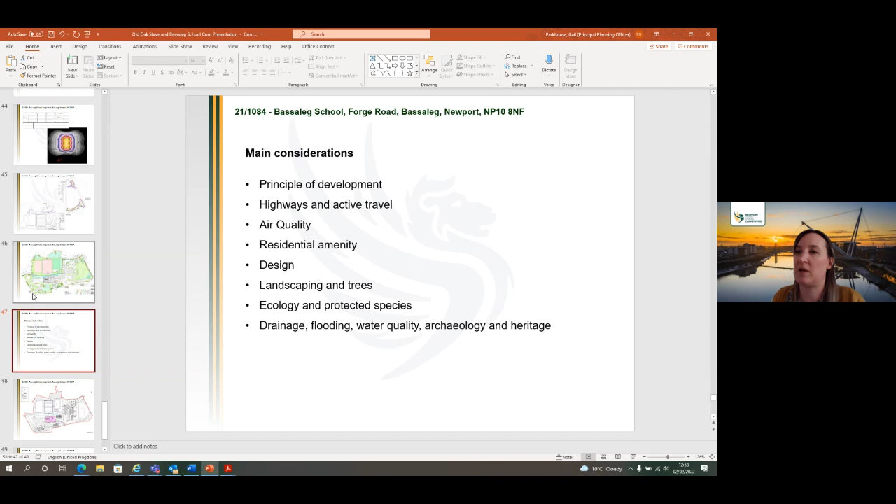The main causes of poor air quality are industrial and road traffic emissions. So an air quality assessment has been submitted with the application, and as there would be an increase in pupil and staff numbers, there would obviously be an increase in vehicle movements, which we've already talked about, including construction vehicles during the construction phase. So the air quality assessment can be summarised into the following bullet points. These are the conclusions it has made.

The background pollutant concentrations within the application site itself are well below the objectives set out in the air quality regulations. So air quality within the site itself is good. There would be HGV construction vehicles during the construction phase, but these would be temporary, and the air quality assessment concludes that there'd be no lasting effects on local air quality.

Because the number of vehicles expected to be generated by the proposed development and which would travel along Caerphilly Road are below the threshold for a more detailed air quality assessment, and this is a threshold set out by the Environmental Protection UK and the Institute of Air Quality Management Guidance. Because of this, the impact is considered not to be significant enough on local air quality to warrant any further assessment.

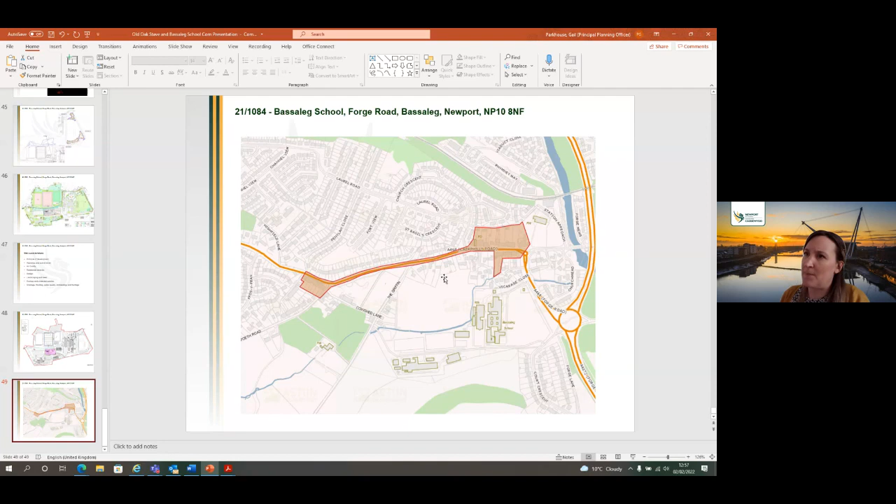Looking then at residential amenity, there are a number of properties which share or are close to the boundaries of the school. The main part of the proposal, the teaching block, would be located centrally within the school grounds and well away from those neighbouring properties, and as such we do not consider this to cause any harm to privacy, no loss of light or overbearing impacts.

The proposals include those floodlighting columns, that is those 6 columns lighting the central 3G pitch. Lighting information has been submitted with the application, and the Environmental Health Officer for the Council has advised us that they have no objection, subject to a condition which requires lighting levels to not exceed levels set out in industry standard guidance. So they're satisfied that residential amenity would be protected.

It's also worth noting that the sports pitches are not permitted to be used beyond those hours I mentioned before, so beyond 9 PM on a weekday or 5 PM on the weekend. So on that basis, we're satisfied that residential amenity would be protected. And then I also mentioned the creation of those earth mounds. So we've looked at those and considered the impact on the neighbouring properties closest to them.

The earth mounds which are proposed in the front sports field are well away from residential properties, and there are other features within the intervening distance, such as roads and boundary treatments, and we're satisfied that residential amenity would be protected in those areas. There would be 2 earth mounds in those main playing fields I mentioned, and they would have slightly closer relationships with neighbouring properties on Caerphilly Road, so properties here, off a cluster of flats known as St Benedict Court, and some houses here called Birch Trees.

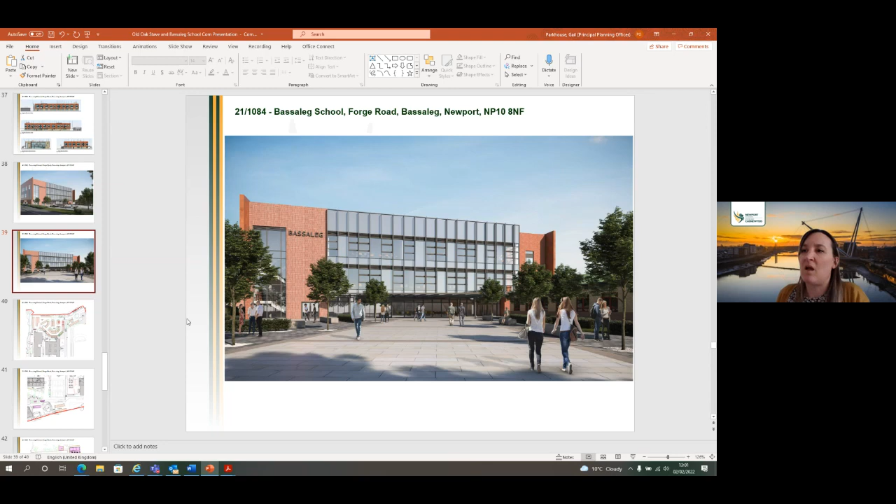Looking at landscaping and trees, the proposals include the loss of a number of trees around the periphery of the site, but around 80 new trees would be planted. Trees within the site which are of significance and value would be protected, and the Council's tree officer is satisfied with this, subject to some conditions to ensure tree protection measures are agreed and implemented.

The landscaping officer has made some recommendations about planting to soften up the appearance of the bin stores. However, we consider their design to be both necessarily functional and acceptable, so we don't consider any further landscaping as necessary there. We're also satisfied that no additional planting beyond that which is proposed is necessary.

We do not consider that the proposed development will result in any harmful impacts on neighbouring properties, so additional planting isn't required to mitigate this. And overall, the landscaping proposals are considered acceptable, subject to conditions which require a maintenance and management plan and tree planting pit details.

Looking at ecology, an ecological impact assessment has been submitted, and it identifies there will be a small number of ecological impacts as a result of the proposals. These include a loss of habitat, indirect construction impacts, and lighting changes when the building's operational. And it also recommended that further survey work for badgers and bats was carried out. So that survey work has been carried out.

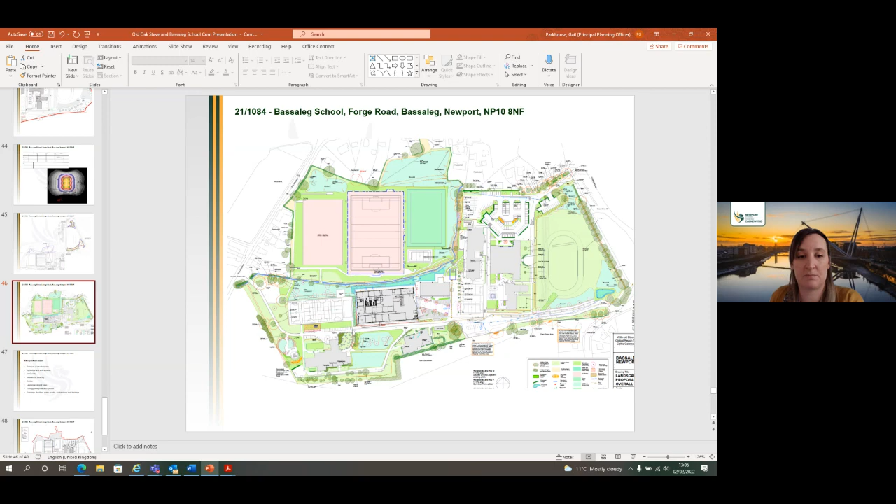Thank you, Chair. Thank you, Gail Parkhouse. Thank you very much. We have a public speaker on this item, Mr. Stephen Harris, who is the agent for LRM Planning. Welcome, Mr. Harris, to the Newport City Council Planning Committee.

Sorry, Chair, we're just shuffling seats between speakers here. No problem, no problem. Yeah, there we go. Okay, so welcome to you, Mr. Harris. Over to you.

Thank you, Chair, and good afternoon, councillors. My name is Stefan Harris of LRM Planning, and I am the planning agent acting on behalf of the applicant for this proposed development. The officer's already given you a detailed presentation alongside her comprehensive report as to why this application should be approved. So I intend to cover some of the key planning considerations and touch upon some of the other relevant factors. As mentioned, members will recall receiving an application for playing pitches at Bassaleg School, which was heard at committee last July.

The proposed new teaching block would have been part of that same application, but ecological survey seasons conspired against us submitting them as one application at the time. Accordingly, though, this project has been a long time in the offing and is therefore a robust and well considered proposal. The application before you is for a new school building within the grounds of an established school site, complementing and expanding upon the existing accommodation and allowing an increase in the school capacity. Newly generated school places will be filled by pupils from local primary schools. The new teaching block will replace existing demountable structures and outdated teaching facilities, negating the need for any further demountable structures over the coming years. Therefore, given the siting of the building within the school grounds, the principle of development is firmly established.

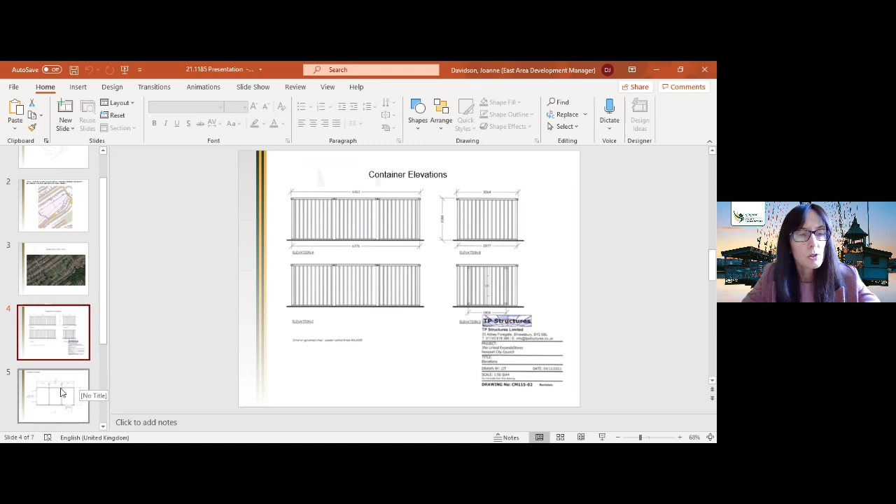Collapsible shipping container. The word collapsible has been used in this context because it'll actually come in as a flat pack which they'll assemble on site. So not the usual shipping container I think of, which comes in as a box. So this is a flat pack which looks like a shipping container that they'll put up on site. It's about 6.5 meters long, 3 meters wide, 2 meters deep. So quite modest, bearing in mind the size of the allotments that I showed you just now. There's the footprint of it there with the exact measurements.

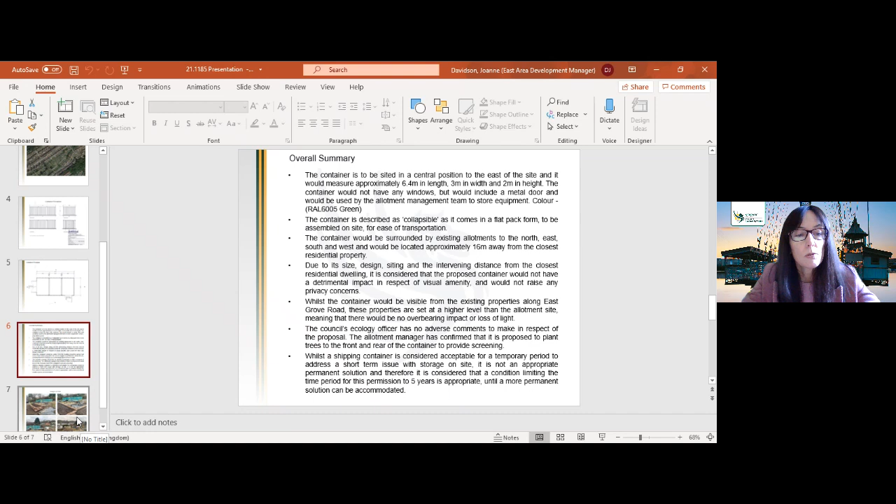That's just an overall summary really of our assessment on this. I'm not regarding this as particularly controversial, to be honest with you. We do have an objection pointing to it potentially being an eyesore. We did consult over 40 property addresses on this application that adjoin the site, but as I say, we've had one objection. There are no other buildings to speak of on the allotment site, although the actual site of the container itself did previously have some sort of shed on it, which has subsequently been demolished.

But these photos helpfully show you that this is situated well within the site, well away from adjoining boundaries with residential properties, and whilst neighbouring residential properties will see it, they'll see it for what it is, i.e. a relatively modest, in this context anyway, storage container for implements, etc., associated with the running of the allotments.

We have recommended a condition, limiting it to approximately 5 years, because this is a temporary building after all, but it will give the allotment holders and council plenty of time to consider a more permanent construction if this facility is required. And that's it really, Chair. That's our recommendation, granted with conditions. If I've skipped over anything in trying to make it brief, please let me know. But that's it from me.

Thank you, Councillor. Thank you, Joanne Davidson. Sorry. Over to councillors. Any questions, please? Councillor Guy.

Yeah, can I just say in general terms, not specifically this, that allotments were introduced sort of after the First World War, the Second World War, to make people self-sustainable. And from the point of view of environmental and people getting involved in these things, it's really good. That particular development is well managed. It's a real focus of people getting themselves involved, and from the point of view of physical and mental situation, it's very good. So it's a first-class situation. As I say, I'm just making my judgment on the application.

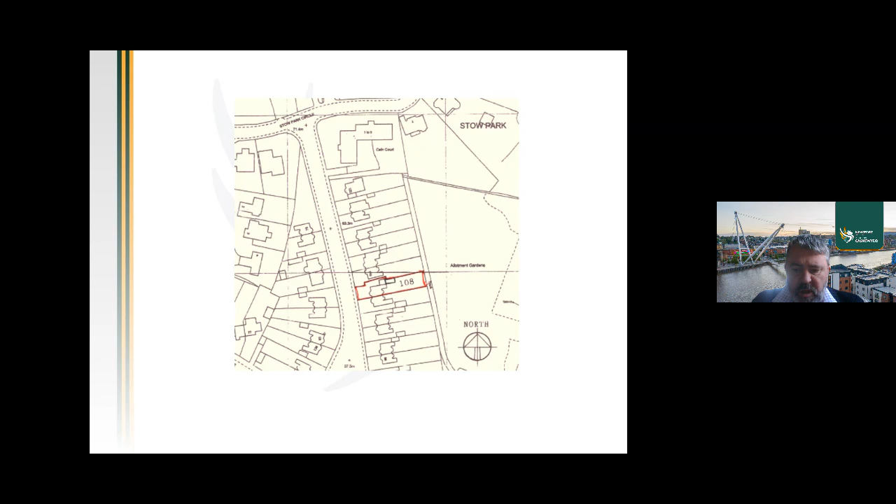Well, the application relates to number 108 Cae Perllan Road in the Gaer. It's a semi-detached two-storey dwelling situated on the east side of Cae Perllan Road, in a run of semi-detached dwellings with allotments to the rear of the site. It's proposed to demolish a garage and construct a two-storey side and rear extension to the north side of the property. And the application has been reported to committee because a councillor is a neighbour to the property. So these are the existing floor plans. As you can see, it's a 3-bedroom dwelling with a lean-to single-storey extension at the back. And these are the existing elevations.

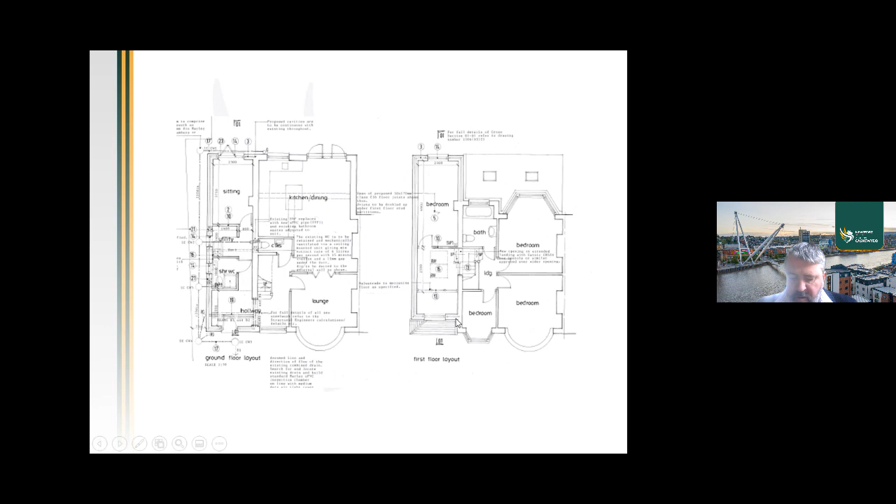And these are the proposed floor layouts. So you can see on the left side the extension. As I say, it's a 2-storey extension. On the north side, it's flush at ground floor with the front elevation of the existing property, but set back at first floor by 0.75 metres, and then it extends to the rear of the rearmost part of the existing 2-storey part of the property, and it extends back by 3.2 metres in depth, and it's set off the site boundary by 0.75 metres.

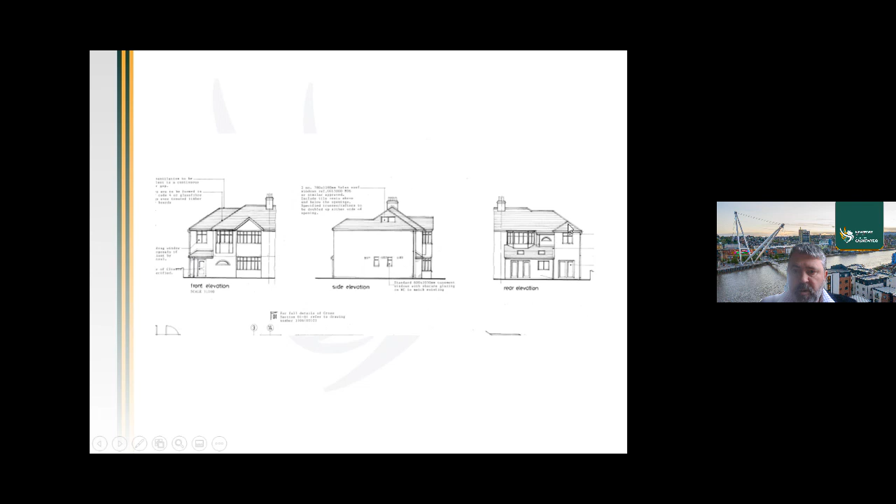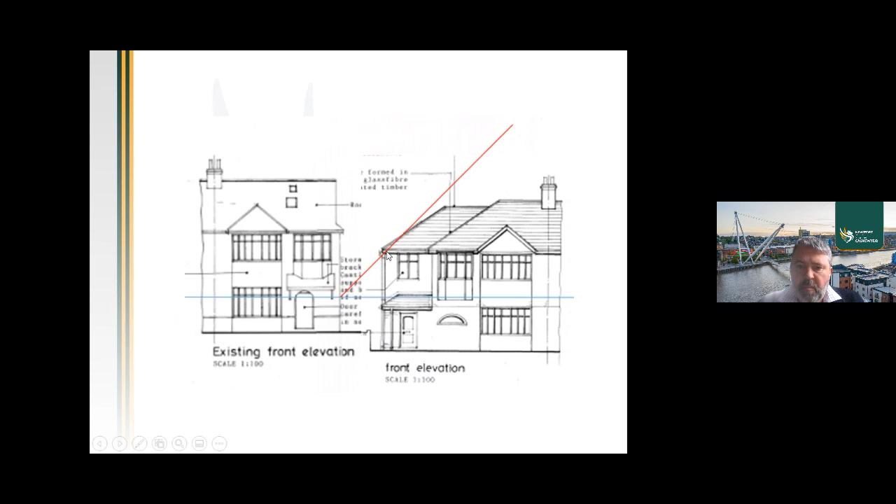And then looking at the bird's eye view, you can see that clearly a 45-degree splay will be disrupted by the proposed extension. So in terms of the daylight tests, both tests fail, and the supplementary planning guidance says that in those circumstances an application should not be supported.

In terms of looking at the impact on the property to the south, number 106, which is the adjoining semi-detached property. So you can see that's the application property, and this is the extension here. And this is the layout of number 106. Again, looking at those two daylight tests, the horizontal or the bird's eye view, you can see that it passes. This does not disrupt that line. And in the vertical, again, this is the extension, and the daylight test in the vertical isn't disrupted either.

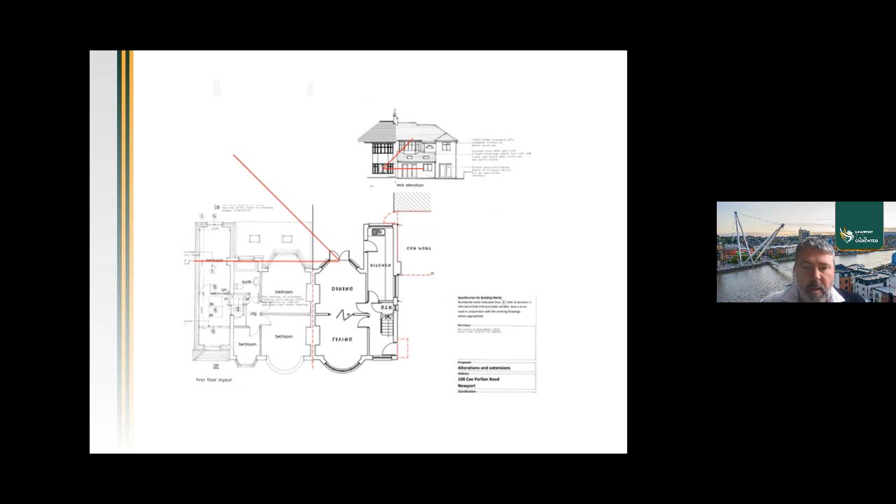Finally, in terms of parking, we are seeing the loss of some driveway and a garage. They have laid out the front forecourt in block paving, and they're proposing to slightly widen the driveway. And highways are happy with this arrangement. They're saying that it's no different to having 3 parking spaces in tandem, and this would enable 3 cars to be parked off the property. So highways have got no objection to the application.

So in summary, we are recommending that permission be refused for 2 reasons. One, the visual impact on the street scene and the adverse impact on the character of the street scene due to the closure of the void between the 2 properties. And secondly, the adverse impact on the study of number 110 Cae Perllan Road and the impact on the amenities of the occupiers of that property. And that's it, Chair. Thank you.

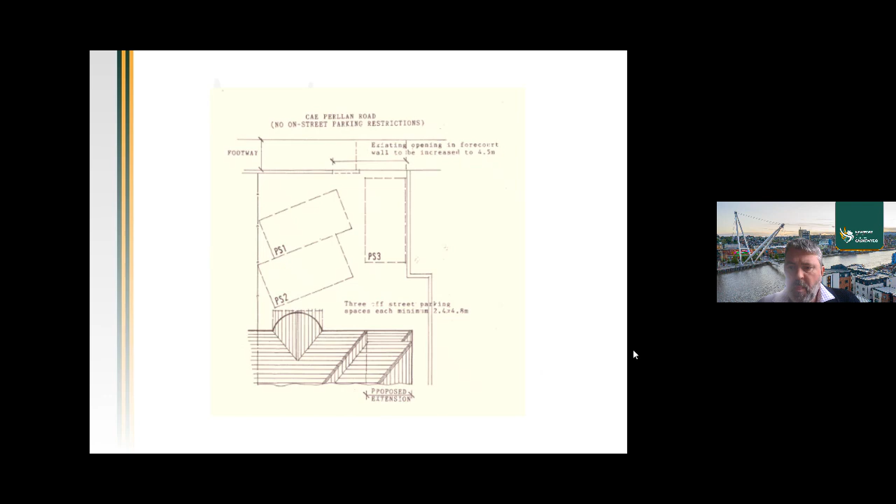Thank you very much. Thank you. Thank you. Committee?

John Jones, Councillor. Thank you, Chair. Hello, Stephen. Looking at your report and your presentation, it's very interesting to see these type of style houses and how they are set out, and the space between the houses is very strong character. I believe in what you're saying, it would have a detrimental effect on 110, and for that reason, I'm pretty much against the idea. I'm supporting your recommendation to refuse it.

I honestly think most of those houses either get extensions on the back or extensions in the roof, and perhaps small single extensions at the back. I think, really speaking, it would really reverse the character of the house and the spacing. So I really do feel that it shouldn't go ahead, but that's my thoughts at the moment. Thank you. Okay, thank you, Councillor Jones. Any other committee member, please?

Chair, I'll second if that was a proposal by Councillor Jones. Yes, sorry, it's my proposal. If somebody can second it, that'd be great. Thank you. Okay, so it's been proposed that we accept the officer's recommendation, which is refusal. That's been seconded. Yvonne, you've indicated you wish to speak. I just was going to propose we accepted the officer's recommendation. Okay, thank you. No one else is indicating they wish to speak. Can we move to the vote, please?